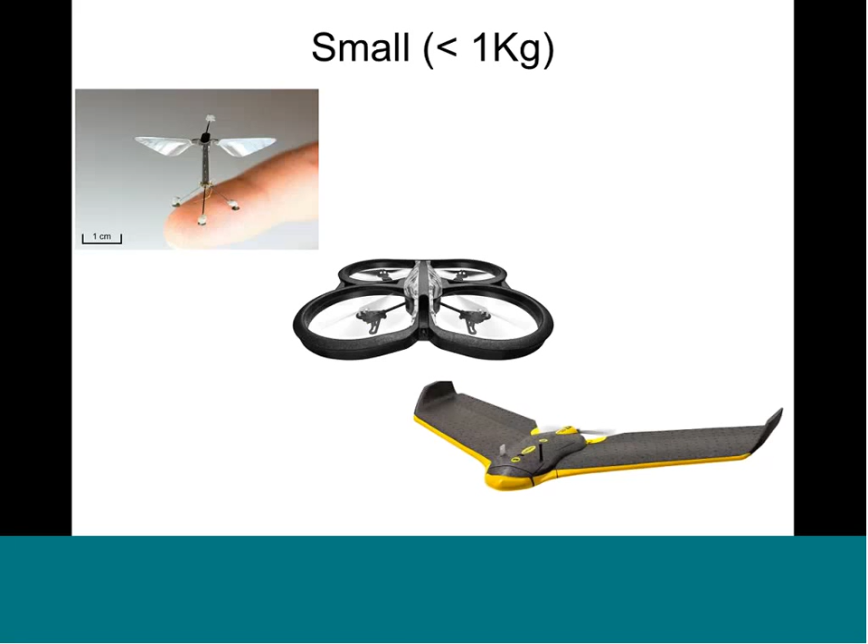Flapping wings can do amazing agility, but the problem is that they tend to have lower autonomy. Though if you want to scale the system down, flapping systems are much better. We could discuss a lot about these things, but that gives you a rough idea of how these systems compare.

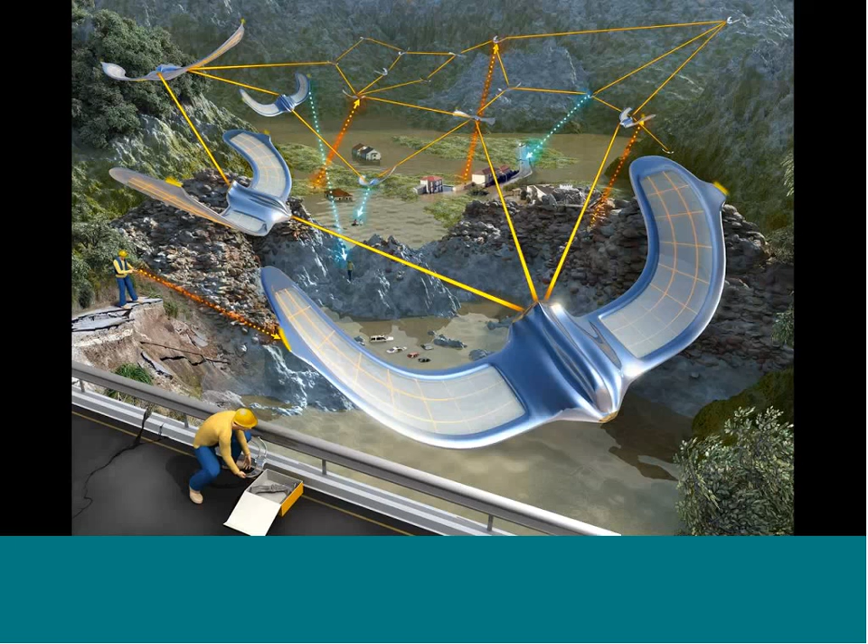And the Swiss Army contacted me and said: look, in Switzerland we have a lot of landslides, and situations where we have isolated villages in the Alps after landslides, and the communication infrastructure doesn't work anymore. Before we send rescuers on the ground, we must set up a communication infrastructure by dispatching trucks at strategic locations, and only when we have that infrastructure in place do we send the rescuers down to the ground. That takes a long time - it can take hours to get in place.

And they asked me: could you develop drones that have emitters and receivers on the wings? They can simply be deployed out of the box by a rescuer. They would go out, map out the entire area, and distribute themselves so that they establish an ad hoc local network that picks up the signals from the rescuers on the ground, creates a bridge in the sky, and connects the drones immediately.

And they keep flying by simply following the signals. They said, if you possibly can solve this problem without GPS, that's great - of course, in a defense situation for the Swiss Army, the GPS signal is probably one of the things you cannot count on. And that was a difficult part, because you say, okay, how do you do that?

So, to make a long story short, we used an evolutionary algorithm to evolve a very simple neural network that looks at the magnetic compass these drones have, and looks at the strength of the signal, and looks at the timing - they have a time dimension, looking at the time the signal is detected by these drones as they move out and in. This evolutionary algorithm came up with a solution that we then translated into a simple program that allowed us to connect two people on the ground.

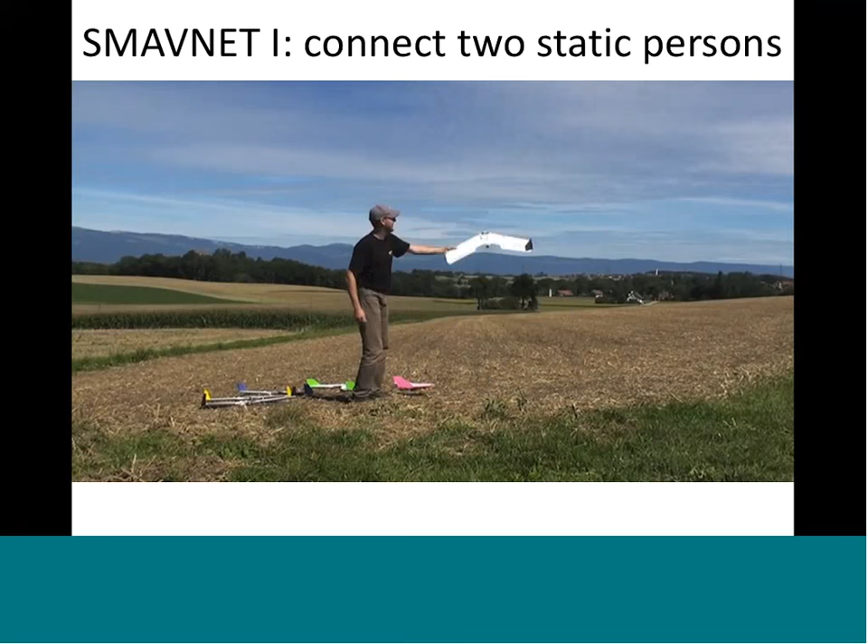So here you see one of the simulated rescuers, one of my students, and there's another student down in the forest, downhill, a few kilometers apart. He's launching the drones. The drones are flying out, spreading out using simply the strength of the signal, searching for the other person. So what they do is move out, then start to spread out, covering a large area until they pick up a signal from a person, and then they line up precisely so that they establish a bridge.

Sorry you can't see the drones precisely moving up in the sky, but essentially this worked very well. Now we are scaling this up to multiple people on the ground, especially teams of people who are moving in cities where you've got these canyons, so the signal is very restricted.

We have also been looking into sound. Oh, there is no sound. That's a pity. So why don't we have sound?

This is connected, and that's a little bit of a problem. Let me just see if I can get the sound, one second, because there is a lot of stuff that has sound. System preferences, sound, headphone port. Yes, it's in here. Should be okay. Something happened, right? Okay, let's try again. Okay, let's see. Okay, this is not working. This is off. Is it because the power is off?

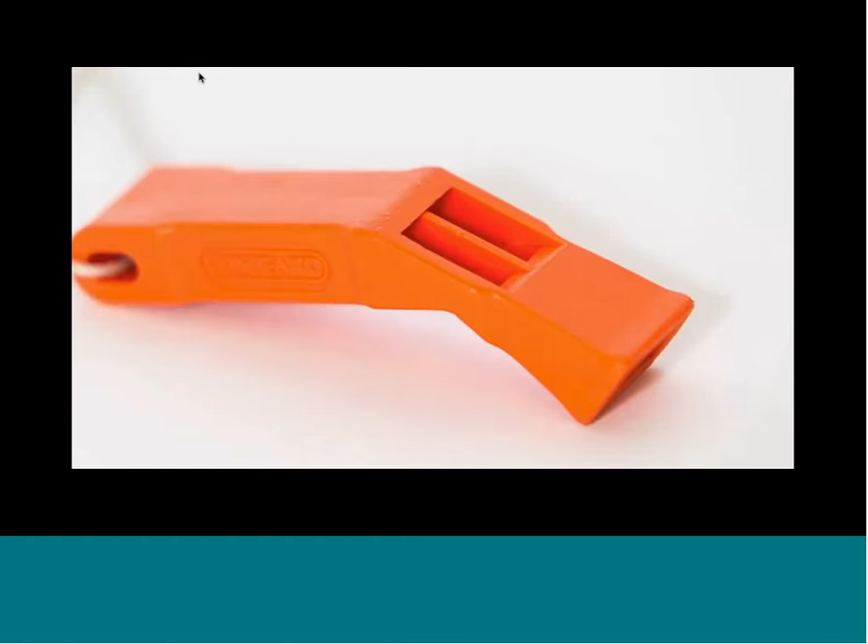Safety whistles are often carried and used by people engaging in outdoor activities such as hikers, mountaineers, skiers, porters.

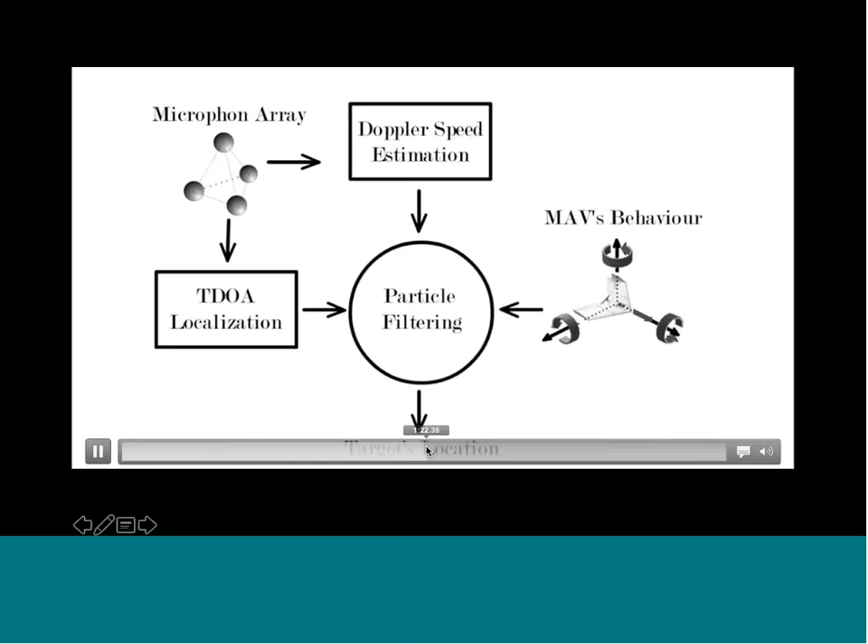Anyway, essentially, let me. Now we don't have video. How comes? What? Why? Okay, now even the slide has disappeared. Is it maybe there is a contact in this? See, the plug is loose, so definitely because the signal is out here. Yeah, so there is no more output from my computer. Projector is on, but it's red light. There is a red light. Excuse me. Yeah, no, I think projector is dead. Yeah. Or at least off. Why does this keep blinking?

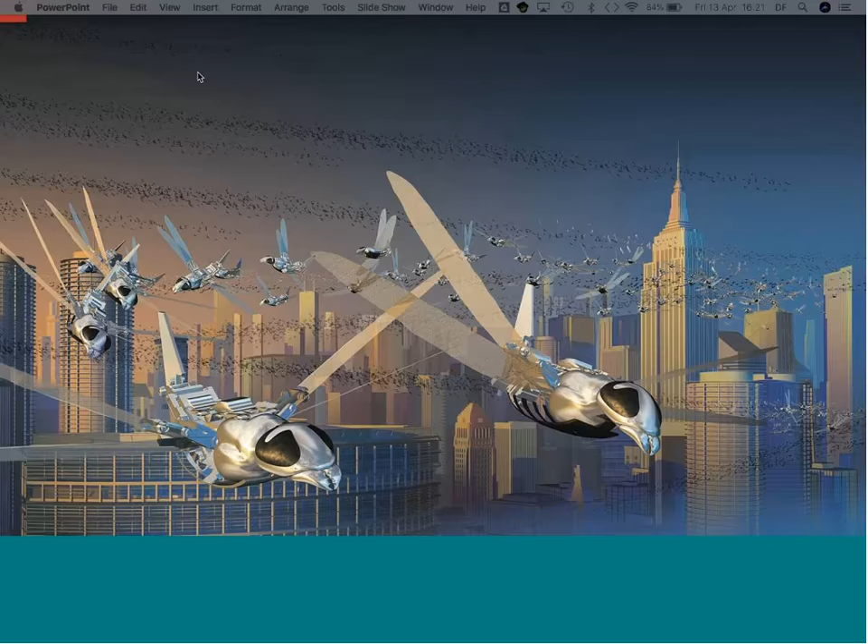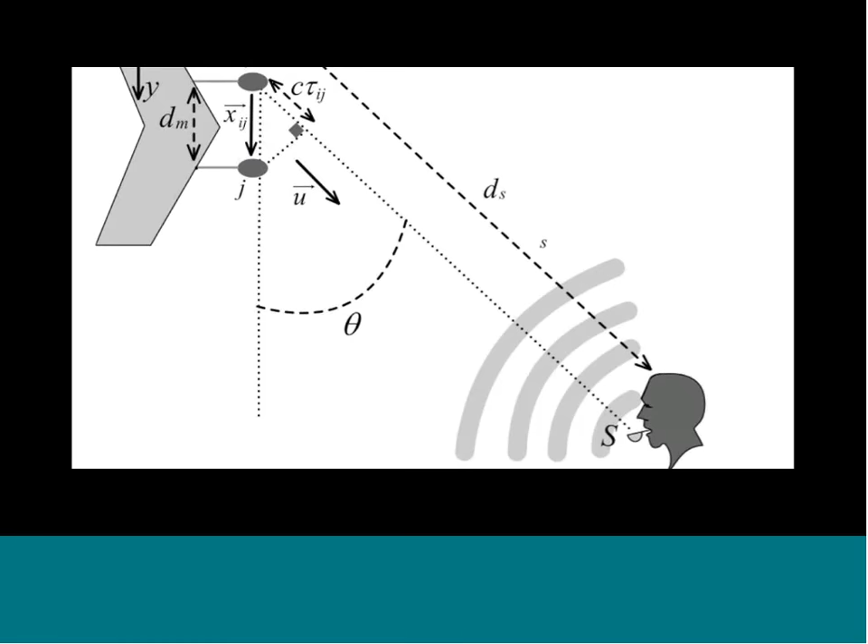So what I want to say is that essentially you can use radio signals, but you can also put microphones on drones, and you can listen to two things. You can listen to emergency sounds from the whistles that people use in emergency situations, and you can use the GPS on the drones to tell the position of the person. So essentially, the drone has microphones, flies out. There is a person who is lost somewhere in the forest. The person uses the whistle, and as the drone flies with the microphones, it can detect where the source is, using particle filtering to process the signals coming from 4 microphones and locate the person. So the drone would fly over the source of the sound, and with the GPS, we would know exactly where the person is.

So that's a very powerful solution. Then it turns out we can also have swarms of drones that know each other, how far they are, and the range and bearing, by listening to each other.

At the beginning, I thought it was impossible because of all the noise that drones make, but it turns out that if you have fixed wings, it's very easy. You can temporarily switch off the engine of the listening drone to listen to the other drones. You can even modulate the rotation of the motor speed of the other drones to give a specific signature to the frequency, so that not only do the drones know the range and bearing of the other drones, but they also know which identity, which drone is what.

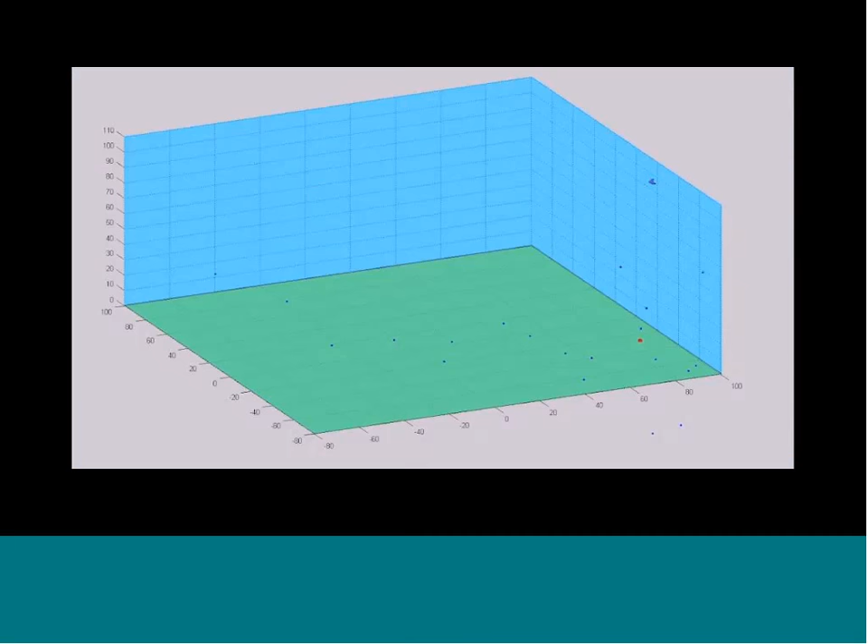That's very interesting. If you have a quadcopter, you cannot temporarily switch off the propellers because that would destabilize the machine. So in that case, we put a very loud beeper on each drone, at a particular frequency not covered by the frequency of the wind and the rotors, and you can do swarming localization by simply listening to the other drones. It's quite an interesting thing, without using additional types of sensors.

But now, vision. Vision is an extremely interesting source of information, and we know that insects use it for a variety of different things: attitude stabilization, collision avoidance, homing, altitude regulation, chasing, swarming, all sorts of things. And it's very lightweight, a passive energy, passive sensing device.

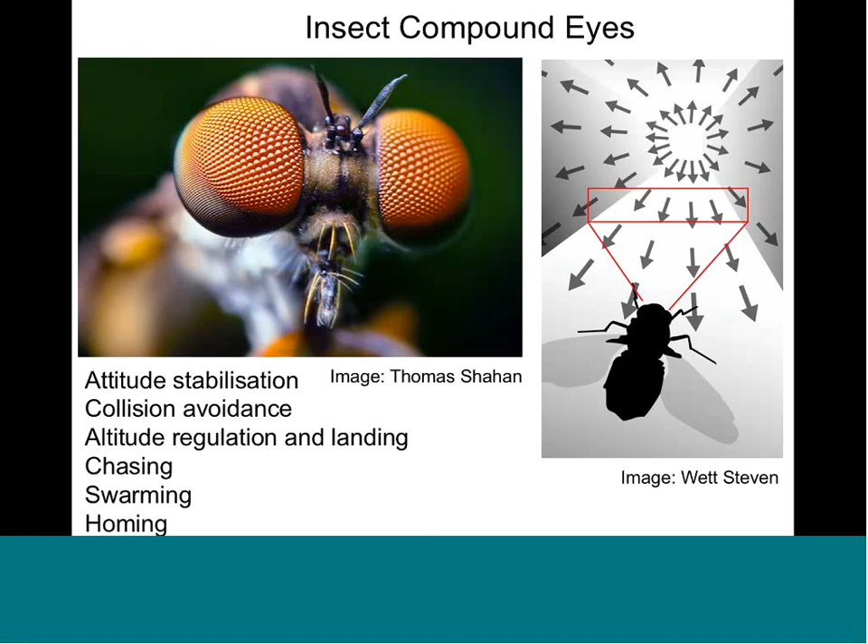We know now for many years that essentially what insects do is they are sensitive to optic flow, which is this pattern of variation of features as the insect flies through the environment. And we know that as long as the insect flies in a translational trajectory, the magnitude of those translations of the optic flow is inversely proportional to time to collision, or you may call it distance, if you know your own speed. A number of models exist, and a number of neurophysiological findings have been done.

For example, in Drosophila, or flies, there are a number of neurons that collect information in the brain from multiple photoreceptors on the compound eyes of the insect, and each of these neurons is specific to a particular pattern of optic flow in the eye, which then, after only two synaptic connections, translates into a pattern of motion of the insect. So it's a very nice machine.

We have, for example in Drosophila, approximately 13 types of neurons sitting in a particular part of the brain called the lobula plate, and we know exactly where the receptive fields are. You can make an automaton, a machine that would react to different patterns of optic flow, like landing, taking off, collision avoidance. We said, okay, could we simplify it and have only two of these neurons?

Imagine you have a fixed wing platform like the one you've seen here. This fixed wing platform essentially controls the trajectory by pitching down and up, and then a rolling motion. The combination of these two control systems gives us all the nice control of the machine.

So essentially we decided to have, you don't see it so well here unfortunately, but we have two kernels, or two neurons. One neuron is sensitive to the optic flow coming from the ventral side of the machine, connected to a positive gain, so whenever the optic flow increases in magnitude, the platform will pitch up. Then we have another kernel looking at the optic flow from the left and right sides, and depending on where there is more magnitude, it would roll to one side or the other. Now we can generalize that.

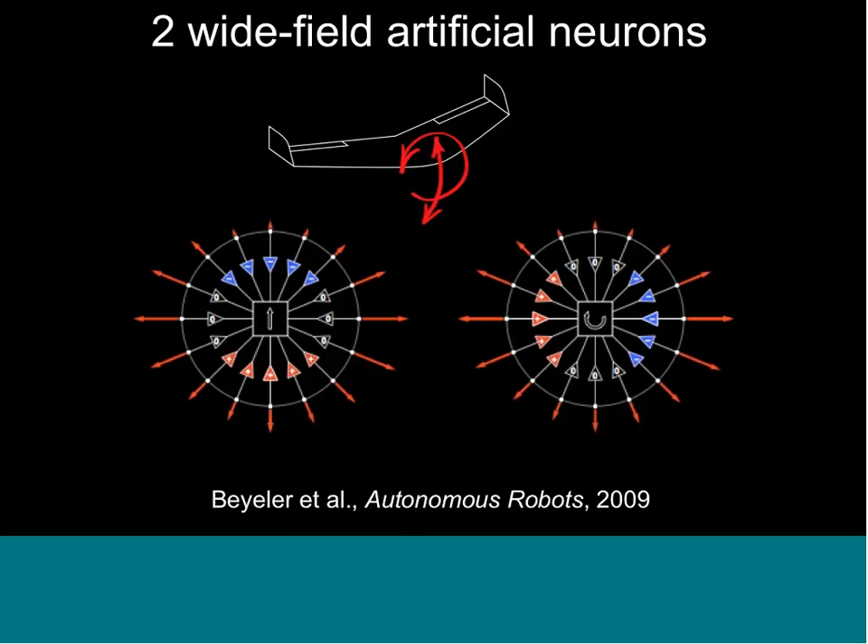We have another neuron that is the same thing, but extended with negative weights on one side and positive on the other. So we have 2 neurons that pull together all this information. Depending on where you look in polar coordinates at the pixel of the camera, we have 2 parameters to adjust, using a simple formula. With any type of geometry, you can use these 2 kernels.

Imagine you have a vision system in a fixed wing platform. We're looking at the top of a fixed wing with multiple cameras, each pointing in a different direction. This camera points to the ventral side, and as you move sideways, you're pointing slightly up. Each camera has a motion detector from one of these optical mouse devices, and the lenses are made so they focus at a certain distance.

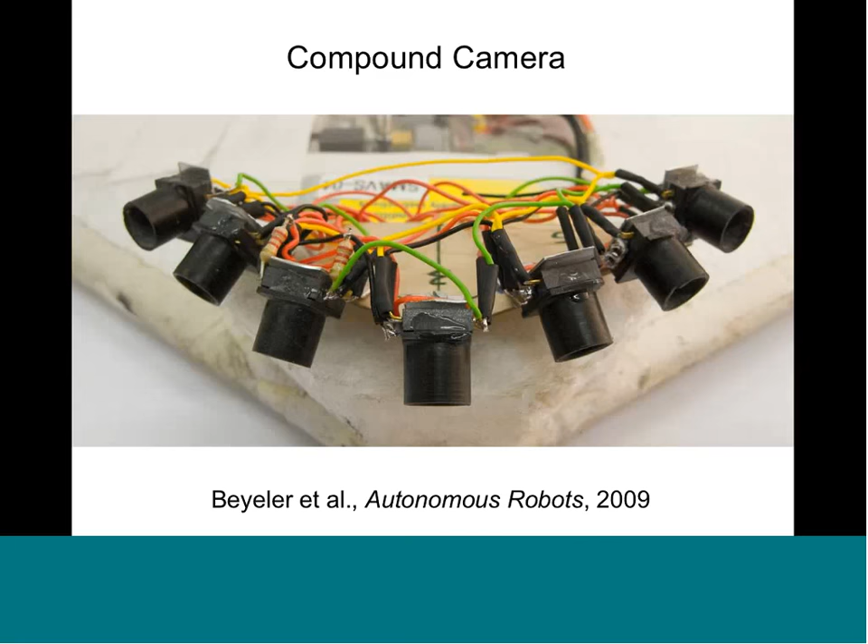Then we have these 2 neurons, essentially 2 lines of C code, that pull together information about the intensity of the optic flow. We use this to control the pitch and roll angle of the platform. We launch this platform in the air, and it's capable of not only avoiding obstacles, but also going up and automatically coming back down, avoiding the ground, doing altitude control. So with just 2 neurons, you get altitude control and obstacle avoidance.

Extremely simple. We did all this work, and at some point we knew how to control multiple drones and add vision-based stabilization. We created our first company, which Reza mentioned, called SenseFly, that back in 2009 started selling platforms like the one you see on the right for imaging purposes.

The machine was extremely simple to control—you launch it in the air, and it's capable of doing all the altitude regulation; people don't need to control it remotely. The company then developed a new platform, a quadcopter, and we sold the company to Parrot a couple of years ago. It became the 2nd largest producer of professional drones in the world, after DJI in China.

But the beautiful thing about the research project I've shown you comes here. That drone didn't have vision-based capabilities to avoid collisions, but we added a few optic flow sensors on the ventral side, because one of the difficult problems is landing these platforms. When they've finished mapping, they have to come back to the operator—typically a farmer or someone operating a mining company using it for mapping.

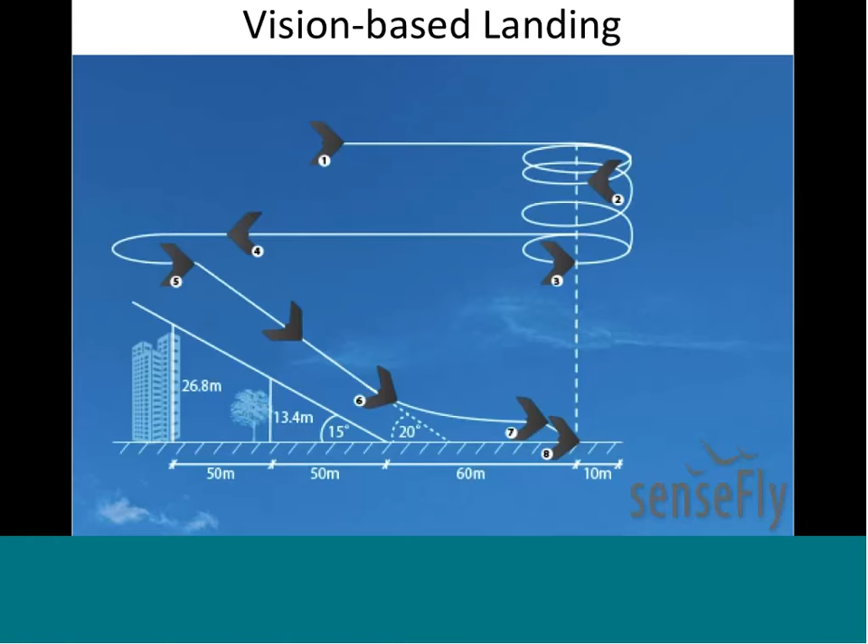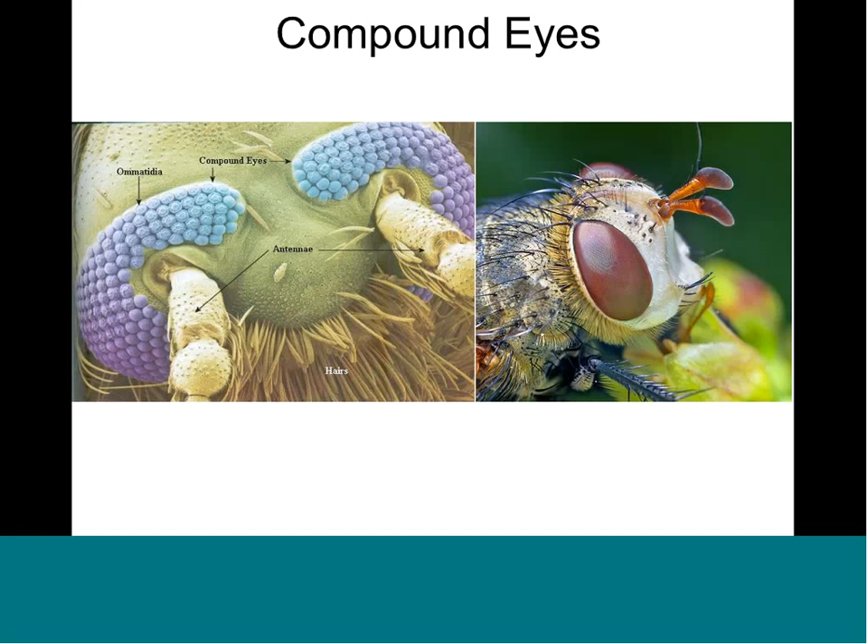But that optic flow camera was a bit bulky. So how could we have compound eyes like those of insects that are so small and compact, yet give such high resolution? I set out to do a European project where I brought together people with different skills in optics and neuromorphic chips, and we built an artificial compound eye composed of 3 layers of materials, manufactured first on a planar surface because we wanted to make it a product.

So we use traditional planar manufacturing procedures. We have one layer of polymer lenses on top, then one layer of neuromorphic chips, analog VLSI chips, that you see in blue here.

Each of these neuromorphic chips mimics the properties of the housefly receptor, so they can adapt to different luminosity of the environment, and they are sensitive to contrast, to the motion in contrast.

Then we have a flexible printed circuit board that takes all the signals out of these photoreceptors, and each lens is precisely aligned with each photoreceptor. We also have a number of black thin film polymers so that we don't have crosstalk of photons coming from neighboring lenses. We make sure each photon coming to one lens goes precisely through a tunnel, precisely onto the photoreceptor.

So we align precisely the optics with the neuromorphic chip and the contact points on the PCB. Then we cut columns of this planar structure down to the flexible PCB, and we bend it around the microcontrollers, like wings, like the eyes of insects cover the brain, the computing power.

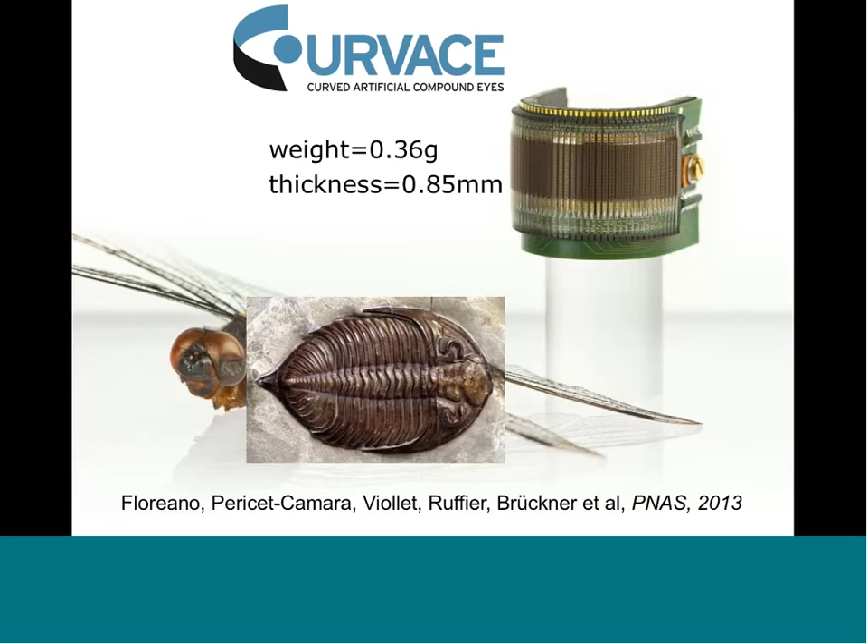You don't see them, but they're sitting on top here. They have two cylindrical compound eyes, and they have exactly the same dimension as our compound eye. So it's amazing. If you give us 250 million years more, I'm sure we'll get down to the size of insects.

But the beautiful thing about this is that you can also make vision tape, what I call vision tapes. You take the same technology, make a line of photoreceptors on a flexible PCB. We have strain sensors, bending sensors, that our colleague Stephanie Lacour developed at EPFL. And we can bend these sensors.

With the strain sensors, we know the relative angle, the visual viewing direction of all the ommatidia. So we can do the computation and give vision to any bent object. We can put it, for example, around a hemisphere like this, and by doing that, we have 360-degree field of view everywhere.

Now you might say there are blind spots here. Blind spots can be easily addressed by slightly changing the viewing direction of every triplet of ommatidia so that we completely cover the 360-degree space.

So in the future—this is work in progress—we would have compound eyes used for obstacle avoidance, maybe glued around the shapes of drones, and then we would have more traditional cameras for doing other types of operations in the center. But no matter how good your visual system is, no matter how good your control system is...

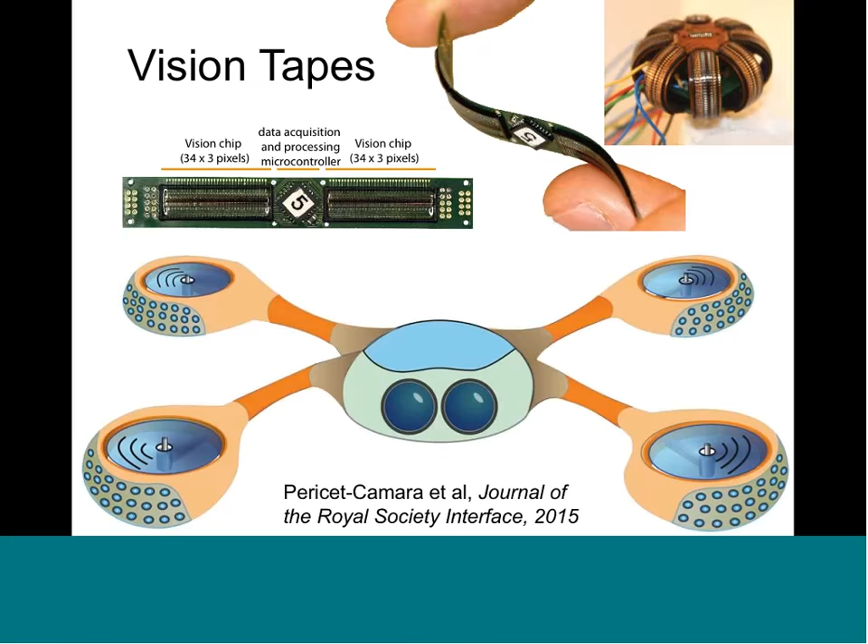We shouldn't try to make drones more intelligent in terms of avoiding obstacles. We should look at what insects do when they collide with things. Essentially, insects use two strategies, I would say. One is the fact that their body is not rigid, so it doesn't break if they fall.

The second thing is work done by Stacey Combes when she was at Harvard. She put these wasps, which are dead, on the tip of a drill. She rotates the drill and lets the tips of the wings of the wasp get in touch with the surface.

She noticed that these wings are extremely resilient. They resist thousands of collisions with an obstacle, and they do so because essentially they have variable stiffness. They have lines of flexion which, under the type of mechanical forces the insects experience during flight, do not bend. But as soon as a much larger mechanical force is applied, they give way, they bend, and then they snap back in place.

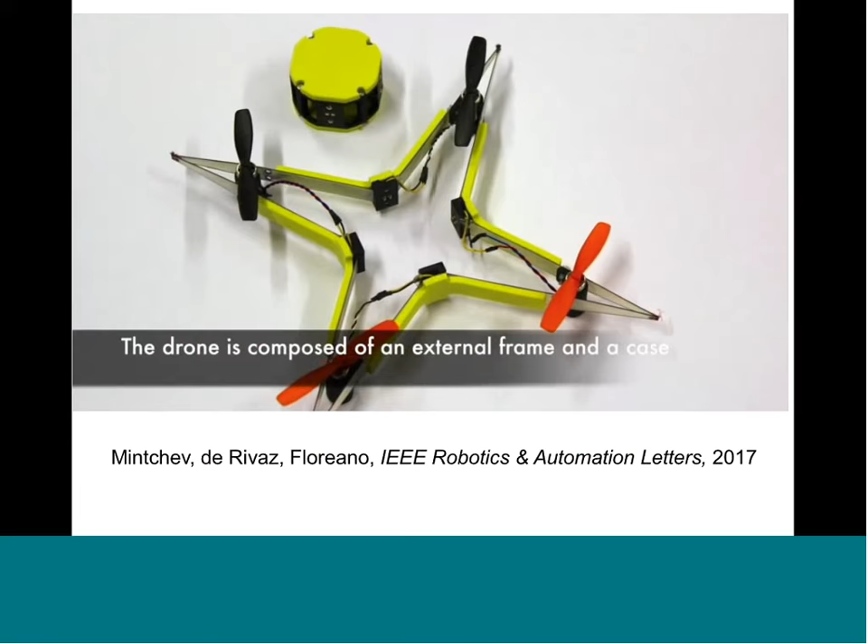So it doesn't look like a wasp. It's made of an external frame and a case. The external frame is extremely flexible — you can bend it with your hands. But like this, you don't have sufficient rigidity for flight.

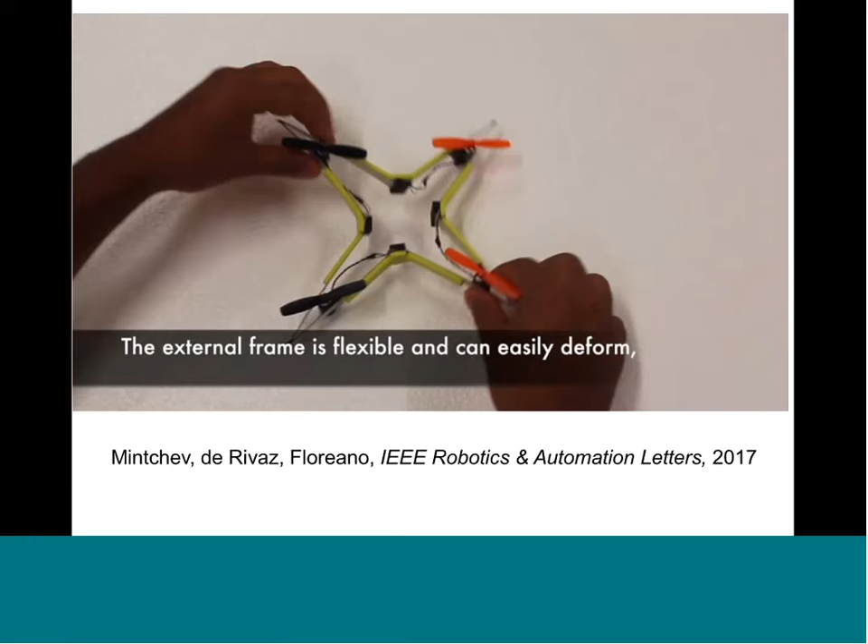What we do is put the inner body, which has a microcontroller and the battery, inside with magnets, and now the structure is extremely rigid. So you see, then you can fly — it's so rigid, now you can fly this.

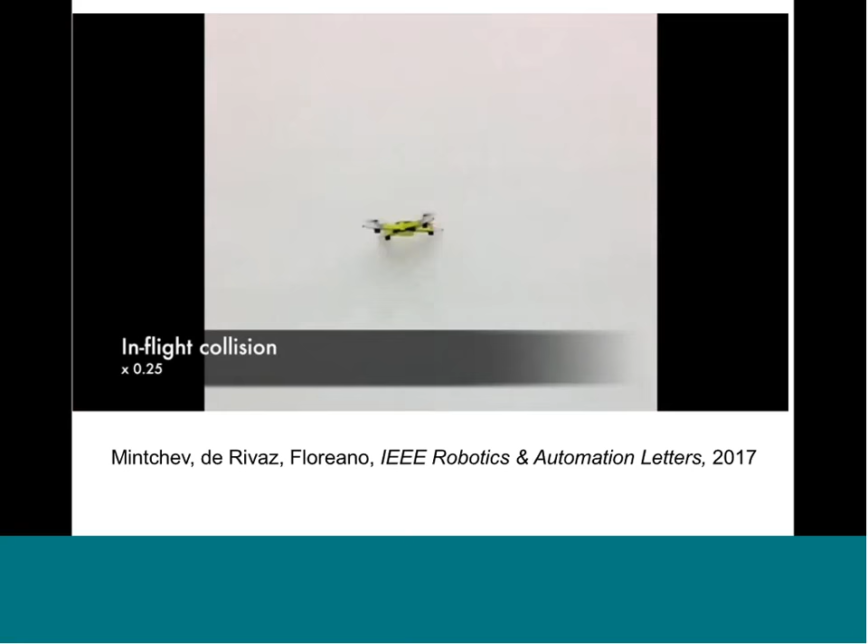Now, as you will see, it flies against the wall, falls on the ground, and then takes off. Let's look at it in slow motion. You will see that the drone flies against there, it deforms, it absorbs the collision, falls on the ground, absorbs the collision, and it doesn't break.

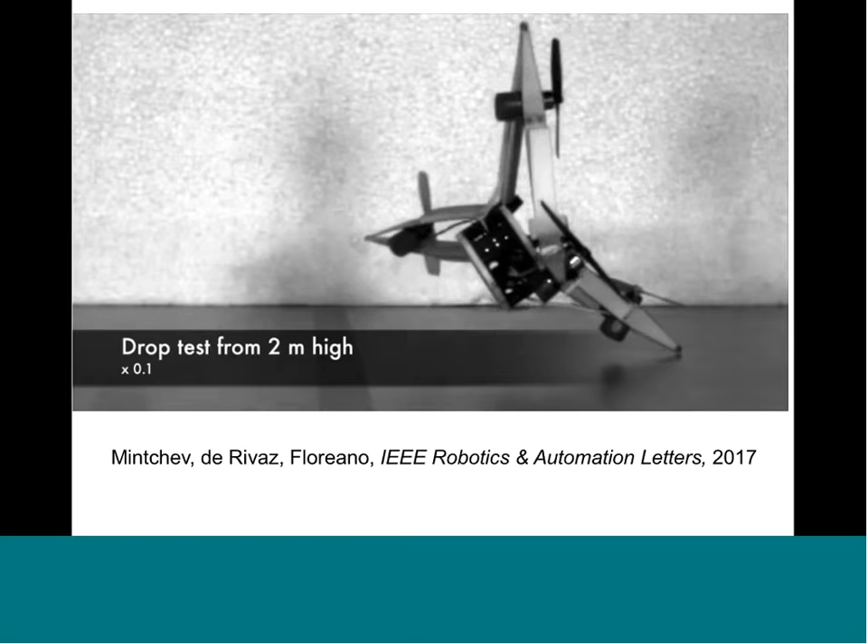Let's look at it again. You see also we have small ropes that keep the inner body in shape, and then it snaps back into shape and doesn't break. So it's a way in which we abstract those rules and make a machine that I call the unbreakable drone.

The second strategy that insects use — I sent a student to Rob Wood at Harvard to measure how flies fly in very confined environments. What we noticed is that flies don't try to avoid obstacles anymore when they fly in this environment. They just collide all the time.

The body absorbs the collision, and they use the legs to upright themselves in flight, or if they fall to the ground, to upright themselves in the right position from where they can take off again. That's another interesting strategy.

So I thought, well, we could design drones that have a cage that can absorb the collision and retractable legs. So when they fall on the ground, when the control system cannot stabilize the drone, they would release the legs to upright themselves again and fly off. And we did indeed make a prototype here.

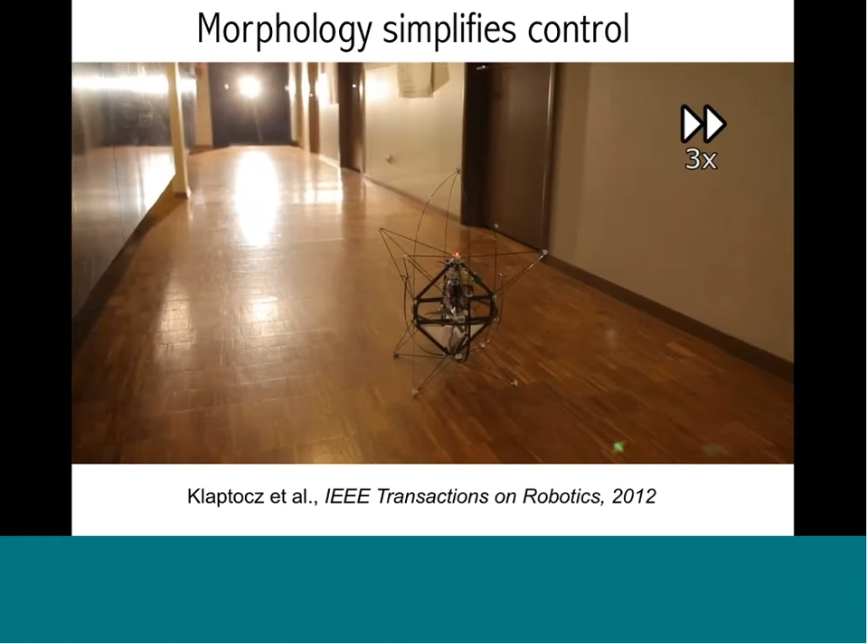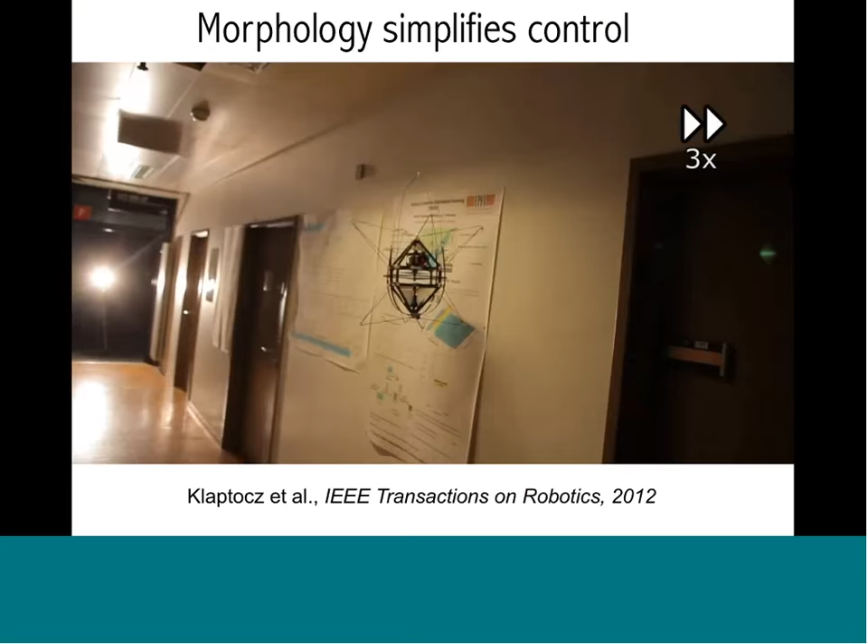It uses an Euler spring cage, and it has retractable legs that upright the drone, and then the drone would fly again. The goal of this drone is to fly towards the end of the corridor where there is light. It has only one light sensor rotating on top of the drone, where the red light is. Thanks to its morphology, all it tries to do is fly towards the light, and it will collide with things, fall on the ground, take off again, and fly again.

So we are trading, if you like, intelligence for morphological and mechanical properties.

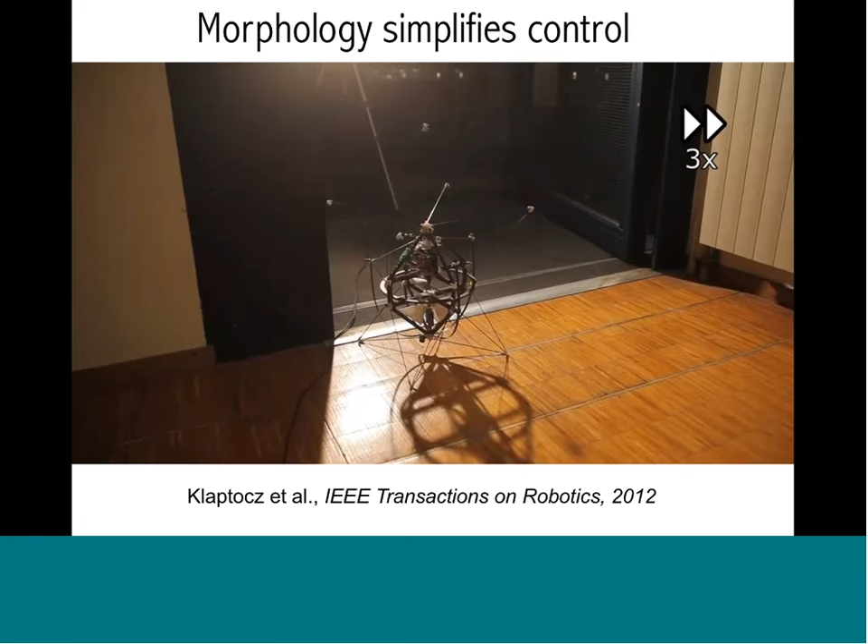That's not a very efficient way of dealing with collisions, because what happens is you have an obstacle, and the thrust vector is destabilized, pointing in a direction that's not the direction you want to go. The drone would fall on the ground, and then you have to use a lot of energy to take off again and fly. So we thought, well, how could we prevent the falling?

And then we thought, what we could do is have an additional cage with a gimbal system that freely absorbs the collision and rotates around the inner cage, so that the propulsion system, which is solidary with the inner cage, remains passively stable as the outer cage absorbs the collision.

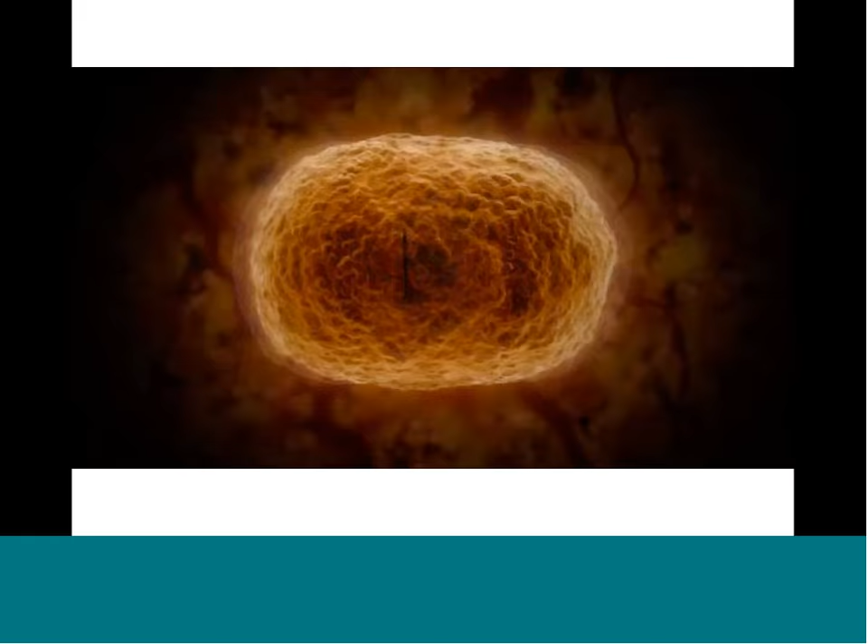So we translated that into this video. The goal of this flying robot is to reproduce the amazing capabilities of insects, especially the fact that they can collide with things and continue flying afterwards.

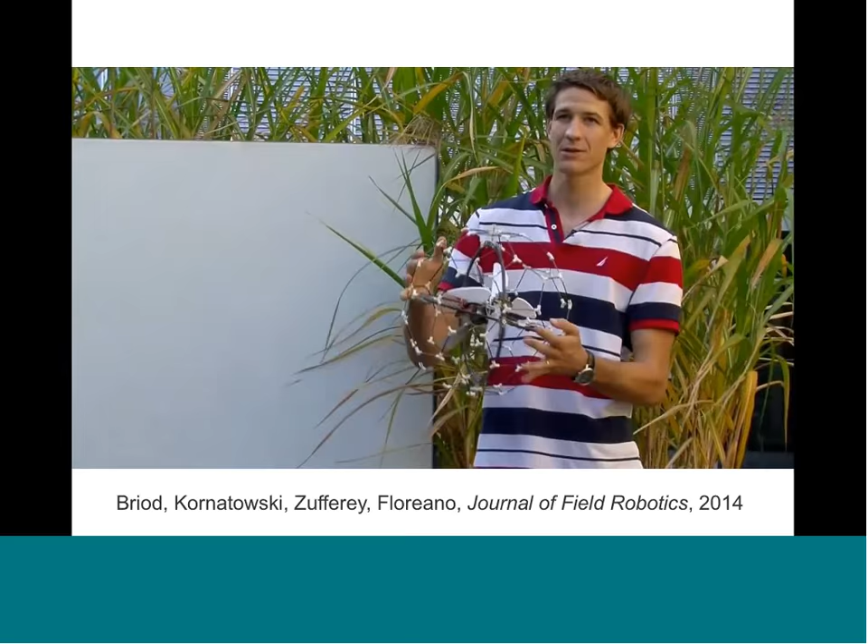To reproduce this, we realized that we could put a lot of intelligence in the mechanics by having this rotating frame around the inner frame that always remains stable even when there are collisions.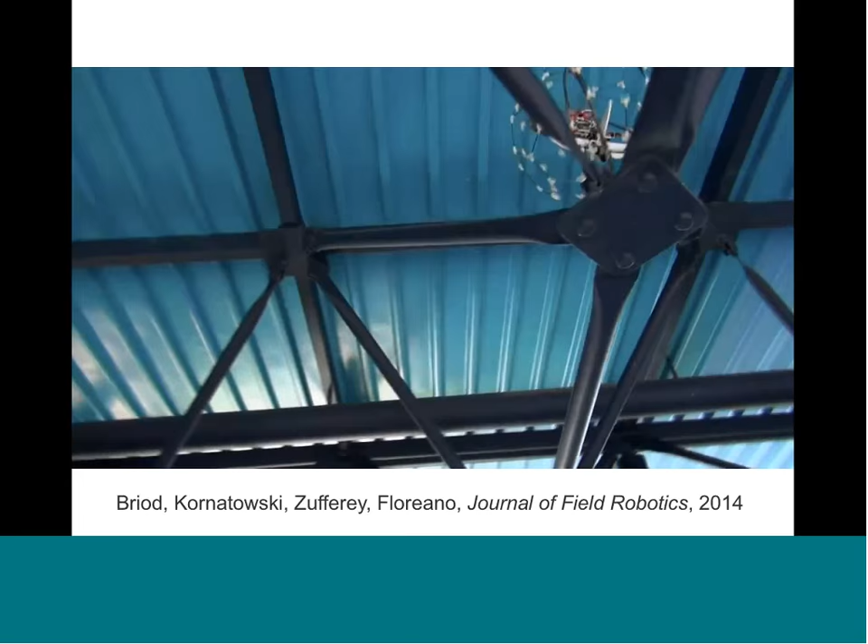This allows us to send the robot into very difficult environments, for example for search and rescue missions where there are obstacles. We can do that without complex obstacle avoidance techniques, giving us a very lightweight platform. The novelty of this platform is its rotating protective frame.

It decouples the inner frame with all the stabilization system and avionics, so that when a collision occurs, the inner frame remains stable and only the outer frame rotates.

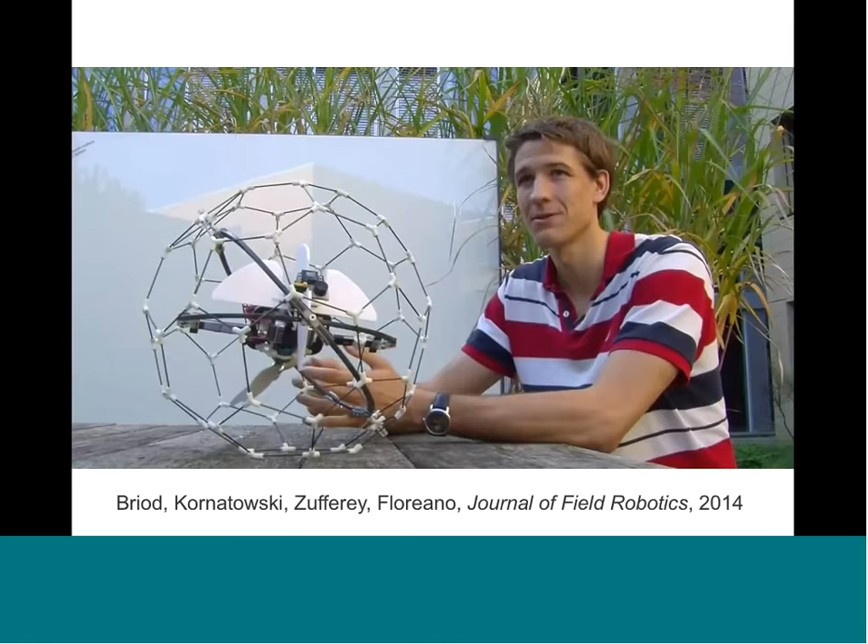To test our robot, we flew it completely automatically through a forest. We just gave it a magnetic direction, and without any obstacle avoidance technique, it was able to fly for several hundred meters while encountering multiple collisions with trees.

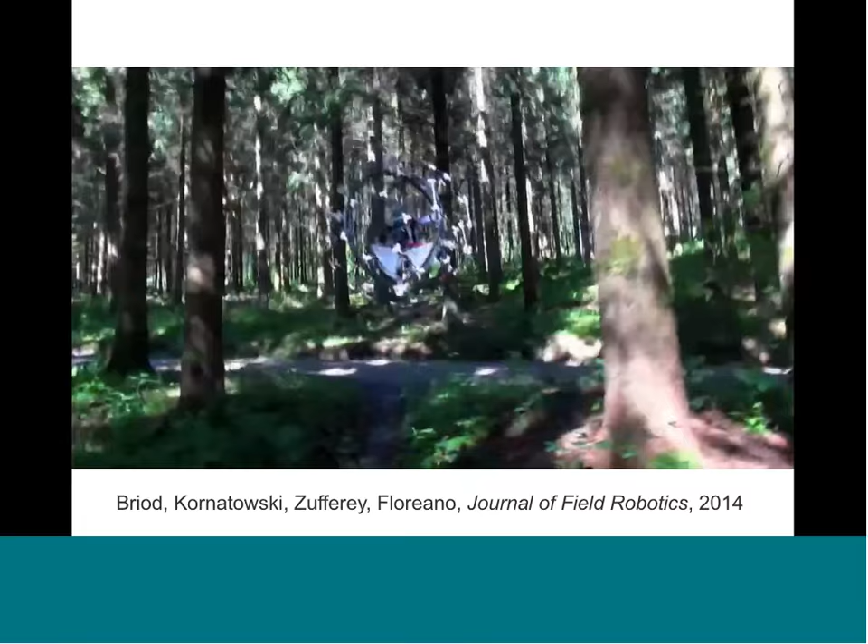So this drone—you see the camera is attached to the propulsion system and it's not much destabilized. You can cancel out the outer frame very easily. It's also safe; you can touch it, you can grab it. So it opens a range of different possibilities.

We sent this drone to the United Arab Emirates competition, Drones for Good. The goal was to locate a person in a collapsed building across the river. Out of 800 entries from 57 countries, back in 2015, we were the only ones who could do this, and my students got a $1 million US award for it.

And we said, hey, we have a great thing here, so we should start a new company, because we can go and inspect things no other system can reach. You can fly in very confined spaces, do inspection of boiler tanks, large industrial boilers, and you can send this into caves.

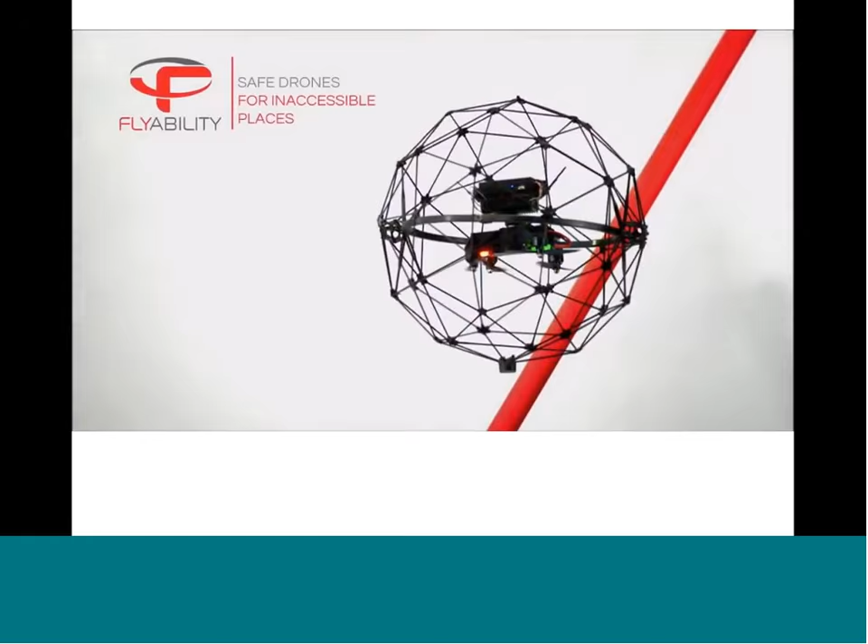So we spun off a new company called Flyability, and this is the refined version of the drone. It's not difficult to pilot this drone—essentially, it's the world's first collision-tolerant drone.

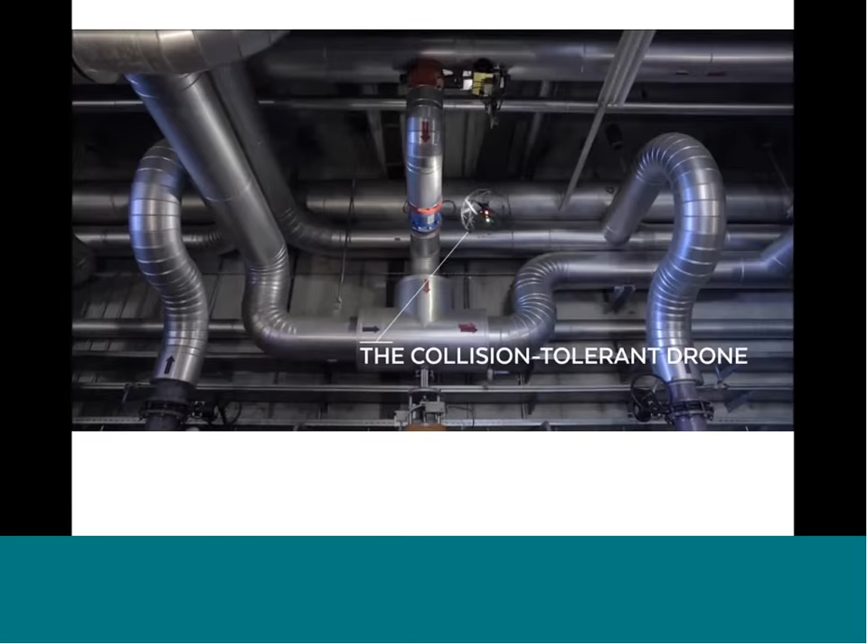We've improved the communication system so that you can send this down hundreds of meters and do inspections where no humans can go. The company is doing very well—it's quite successful and already selling well.

But let's go back to a situation like the Fukushima disaster. You want to send drones to do sensing, for example of radioactive material, but you don't want to get too close because it's very dangerous. So you want to stay a few kilometers away.

Now, if you want to do sensing, you want to go very close down to the ground, so you may want to send a quadcopter. But quadcopters, if you want to cover long distances, need to have a much larger mass than a fixed-wing drone. And if you have a much larger vehicle, you probably cannot go into small places and do inspection.

So we said, how do animals do this? How could we have a flying wing that can also go to the ground and start locomoting to the location where you want?

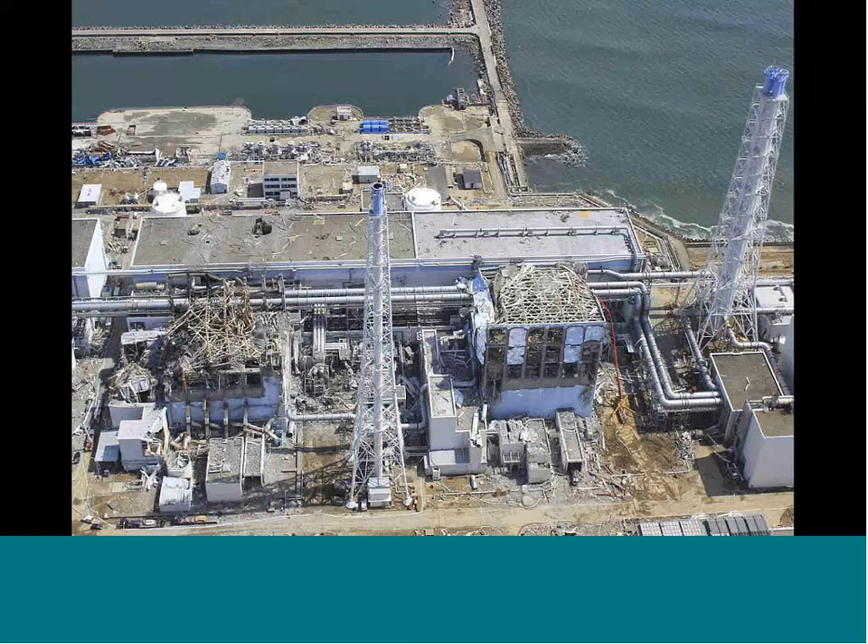Nature is amazing—we found there is an animal, the vampire bat, which reuses its wings for jumping on the ground. It flies near a camel in the desert, then jumps up to the leg of the camel and sucks its blood. We found that very interesting because it's a sort of morphological adaptation for multi-modal locomotion.

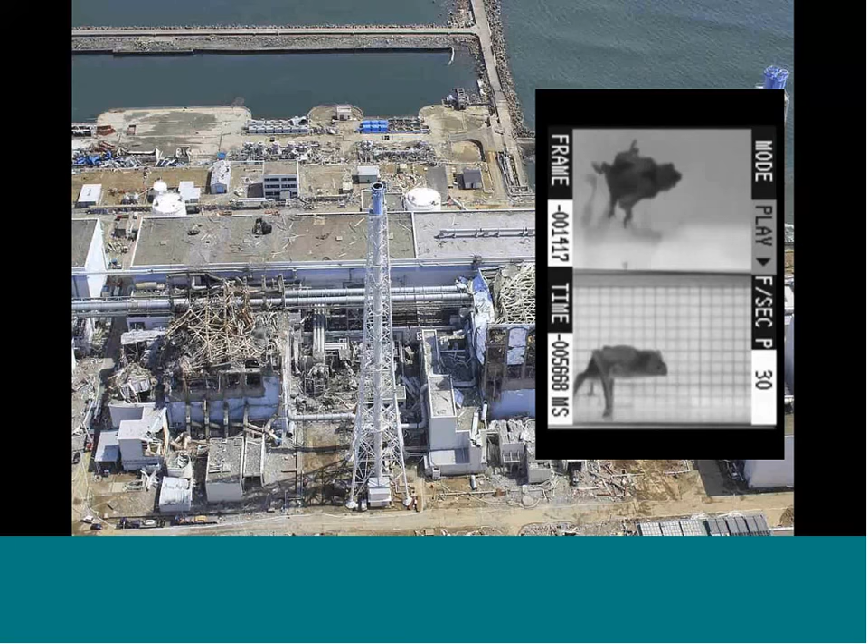Instead of having separate wings and a locomotion system, you just reuse the same actuation system for two different locomotion modes. So we created the first prototype here, which...

The laboratory of intelligent systems is developing a flying platform which has the ability to move on the ground by using its wings only.

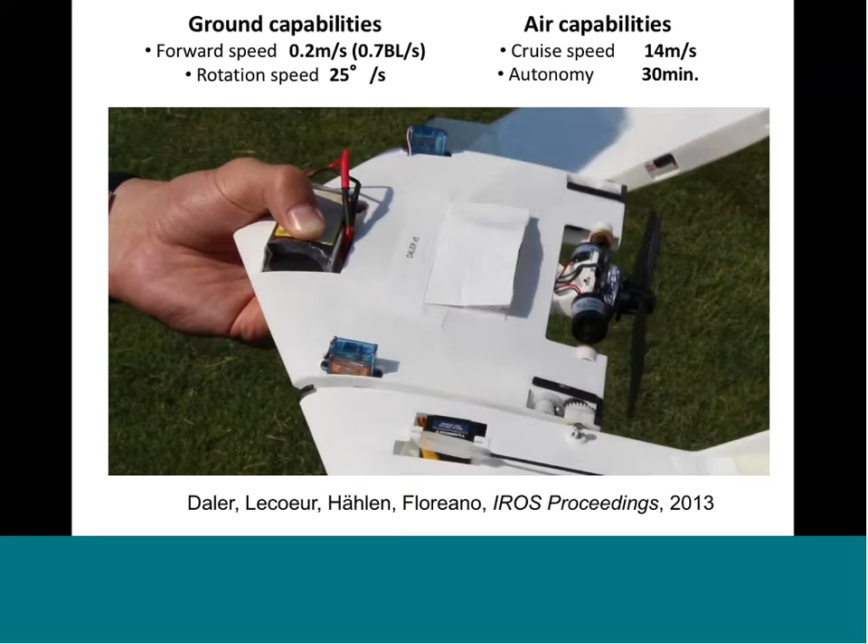A locking wing mechanism was designed to ensure a good position and rigidity of the wings during the flight phase. Once the wings are locked, several motors are used to actuate the elements on the wings which control the flight. After the robot has landed, the wings are unlocked and can rotate continuously, allowing the robot to move on the ground.

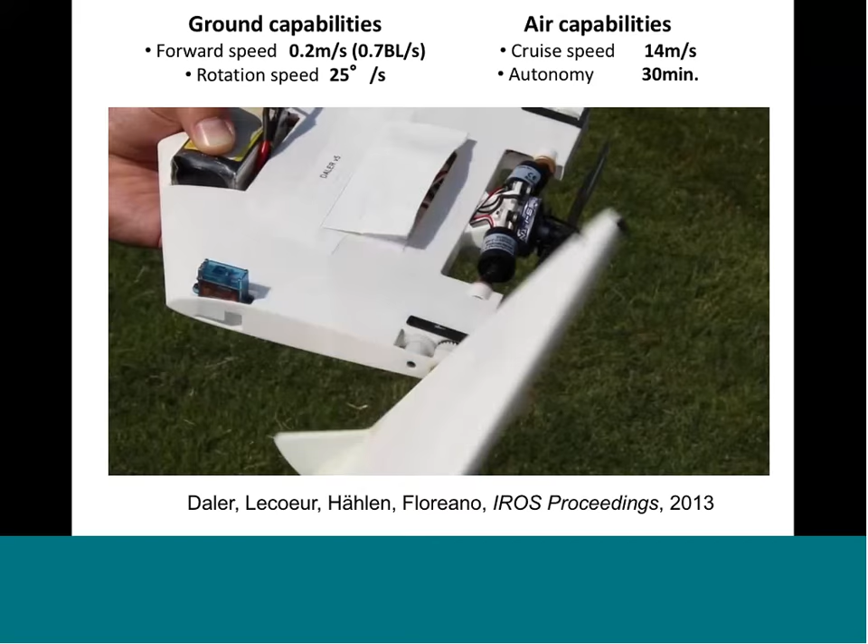It's very stable. Using the wings as legs to move on rough terrains, instead of adding an additional structure to the robot, minimizes its structural mass. Therefore, this design minimizes the total weight of the platform and thus minimizes the impact on the flight performance of the robot.

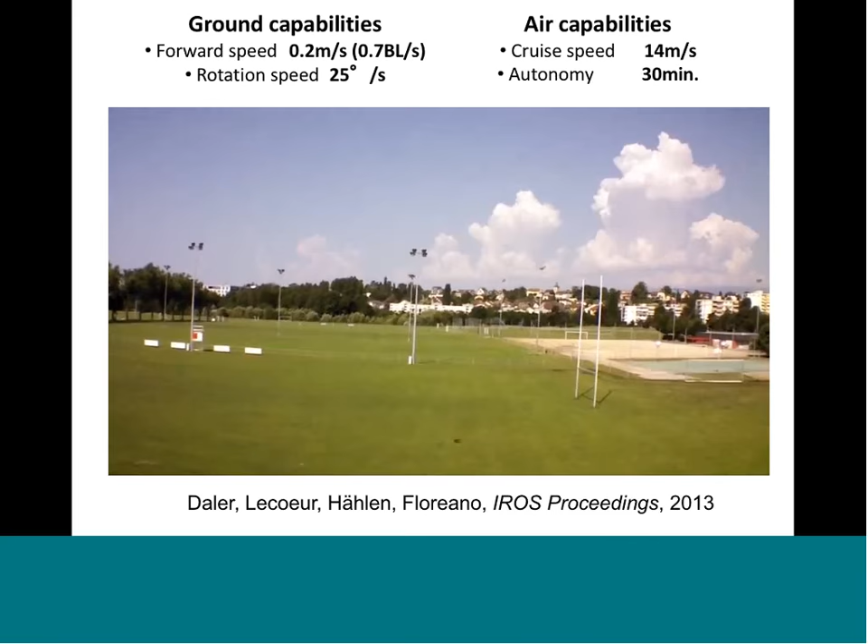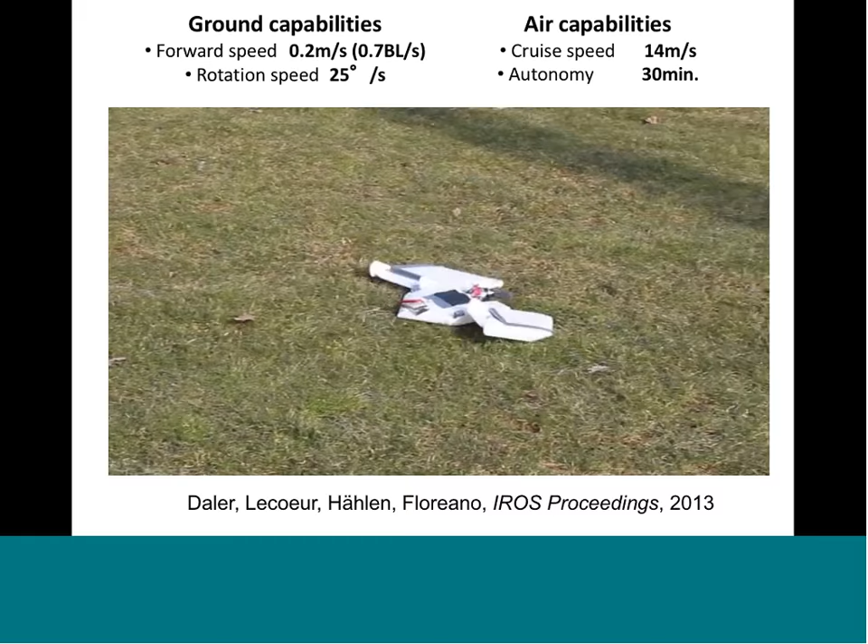The morphology of the robot is optimized for ground speed. It can move forward at 0.2 meters per second and can rotate on the spot at 25 degrees per second. The robot is capable of walking on different surfaces, can overcome high obstacles, and can also navigate rough terrains.

If you want to do multiple types of locomotion, you typically have different types of constraints. For example, if you look at ground and aerial locomotion, you need different values for torque and speed. When you are in the air, you need very little torque, very high speed for the ailerons. When you are on the ground, you need a lot of torque, not very high speed.

When you're flying, you want to have your center of mass slightly forward. When you're on the ground, you want to have your center of mass precisely balanced in the center of your vehicle. The inner ratio, which is essentially the distance of the tips of the wings from the center of mass of the drone: when you're flying, you want to have the wings spread out; when you're walking, you want the tips of the wings closer to your body. So these are different constraints, and when you want to adapt the morphology, you want to bring your system so that these different contrasting values are optimized.

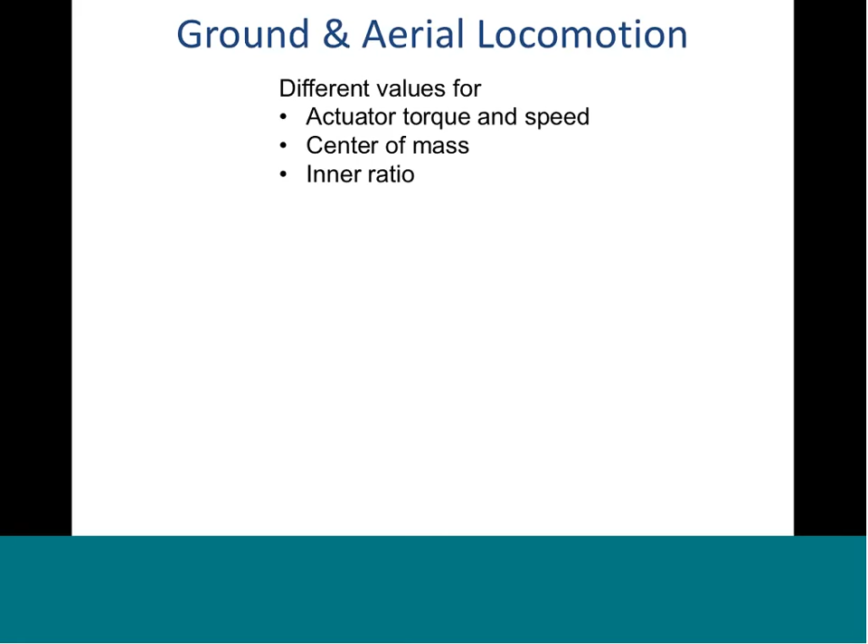So now we looked again at birds, and we see that birds, for example like bats, have certain types of morphologies that allow them to move between those different locomotion modes, especially multimodal locomotion, into a regime that minimizes the cost of transportation.

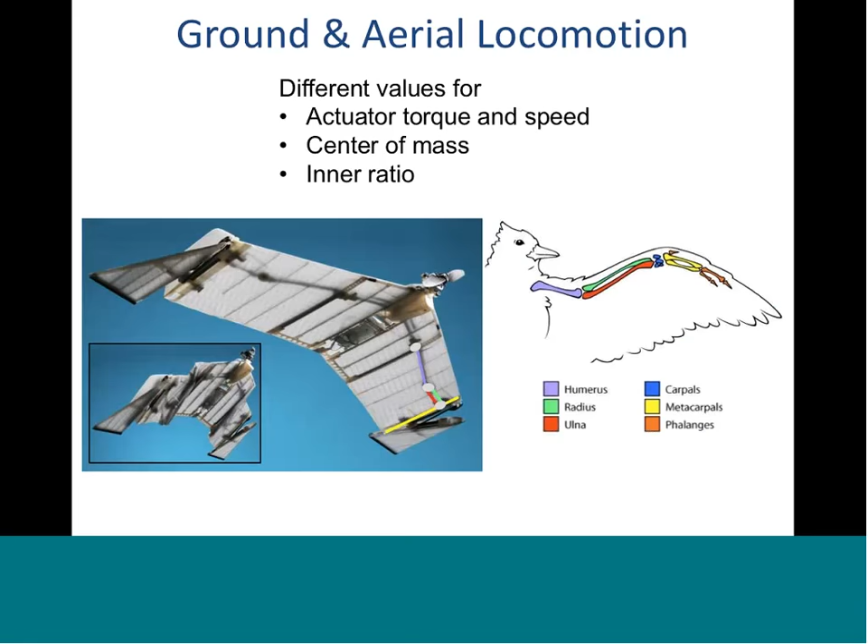And we created a new platform, which is here, which has some springiness and softness to it. There is a system of springs and softness so that you can hit the wings and they will not break, so they can sustain hard landing. So you see here, we are hitting the drone with a hammer, and it doesn't break.

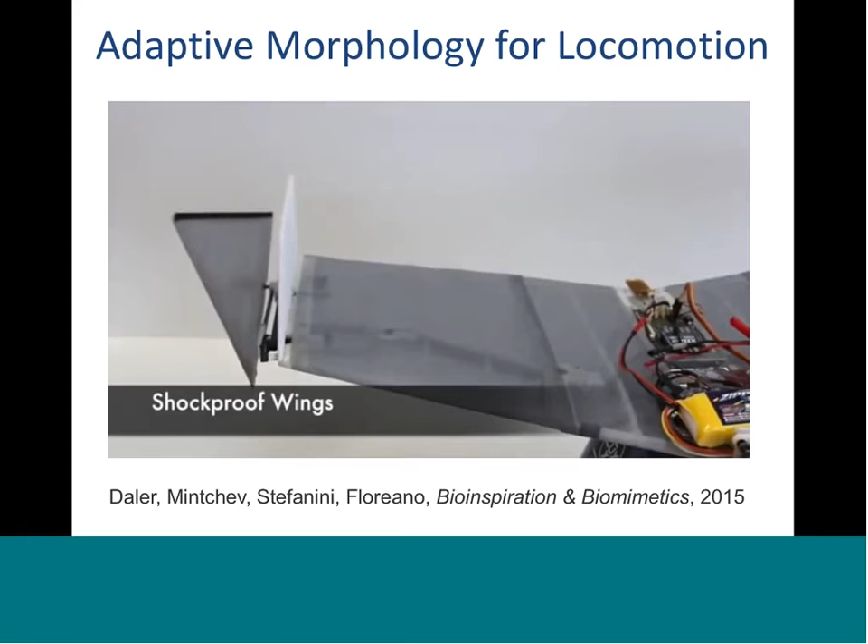So anyway, I don't have time to show the video, but essentially we came up with a principle we call adaptive morphology. We look at animals that change different locomotion modes, and we see how they adapt their morphological shape so that their muscles operate in the optimal regime. Then we extract design principles for drones, for machines that display multiple modes of locomotion.

There is another type of morphological adaptation that birds have, and they use it not for multiple types of locomotion, but for flying in different aerodynamic conditions. For example, if you want to fly at very high speed in order to minimize drag, you want to have a small surface area, but then you will have smaller maneuverability. If you want higher maneuverability, you want to spread out your wings.

So we see that birds, indeed, no matter what the bird is, as they increase flight speed, they also tend to decrease the surface area. So we said, could we have drones? If we want to develop drones that fly, for example, in cities, where sometimes you have urban canyons with strong winds coming, you may want to close your wings, or change the angle, or spread them out. So we said, could we have drones that can change their morphology to adapt to different wind conditions?

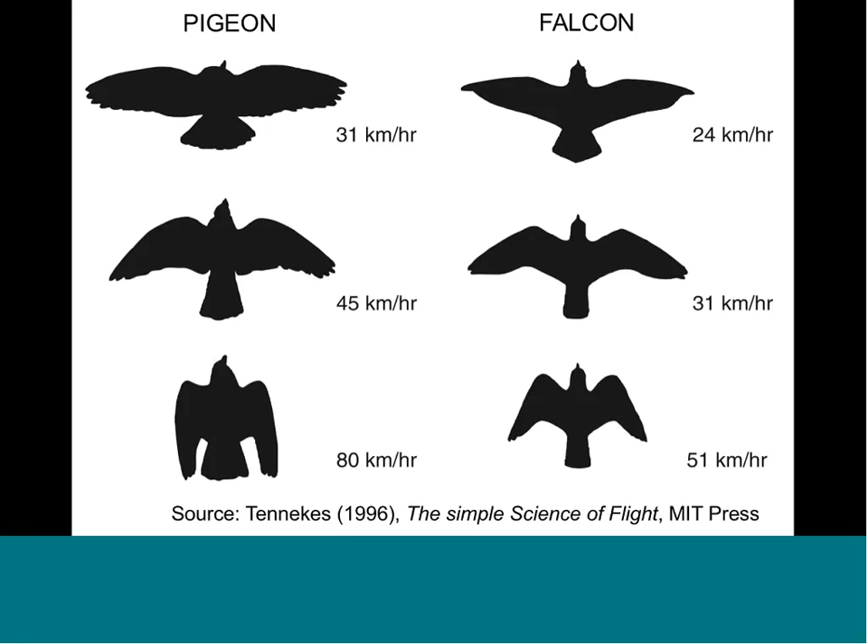Again, we look at birds, and we see that feathers are very interesting because you can easily fold them and change effectively the area of the drone. I'll let this video play, which explains how this works.

So we can have symmetric folding, so we can change the total surface of the wings to fly at different wind speeds more efficiently. We tested all of this in a wind tunnel, of course.

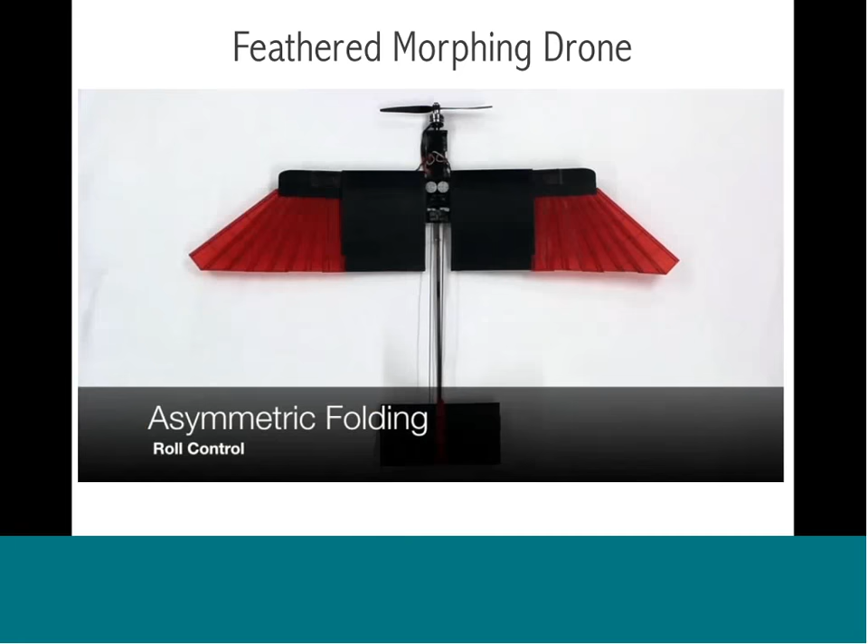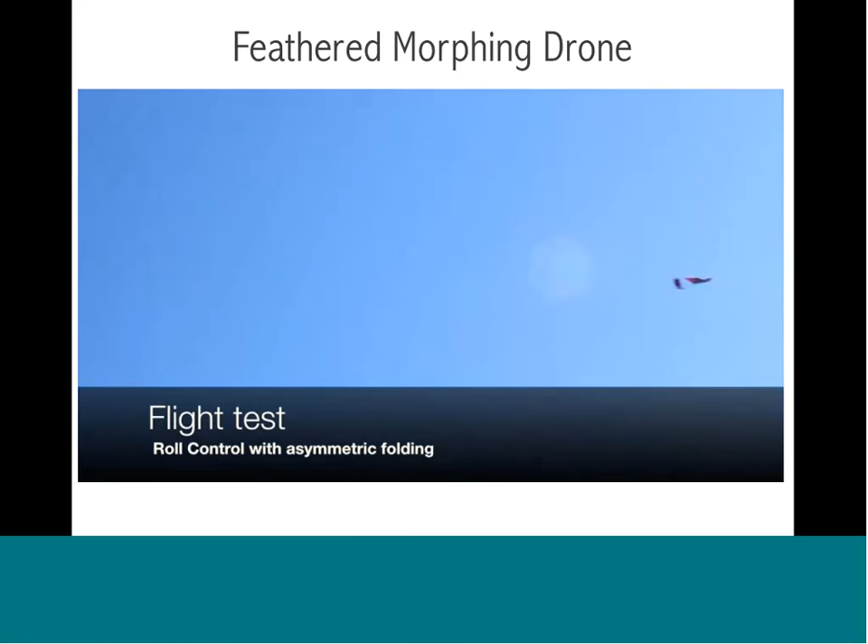And then we can also do asymmetric folding for rolling. So instead of using additional elevons to control the roll, we just asymmetrically switch the morphology of the wings, and we can smoothly control this drone in the air.

The biggest challenge of this project was to design these feathers. One of the things I'd be very interested to talk to Sarah about is how we could do local sensing at the level of the feathers of local turbulence, because we know birds have lots of information coming locally that would allow the system to adapt the morphology without going through a central processing system.

At the moment, this drone is teleoperated, and now we have a project where we are extending this feather structure and this agility of the drone to the softness also of the body, and adding control. So that's what we're working on.

Now, drones have another big problem, and that's size. Because of the laws of physics of aerodynamics, the lift of a drone is proportional to the product of two things: the aerial surface, and the speed of the air over this aerial surface. So in order to increase lift, you can either fly faster, or increase the size of your propellers or wings. And because you cannot fly these small drones much faster than a certain speed, most of the time if you want to carry larger loads, you have larger propellers or larger wings.

And then you have a problem of transporting the drone to the location. Most of the companies that make drones, like my former company, make foldable drones that you can put in a box, then assemble together, and then fly out. DJI makes drones that can fold mechanically. You can fold them; they are still in place.

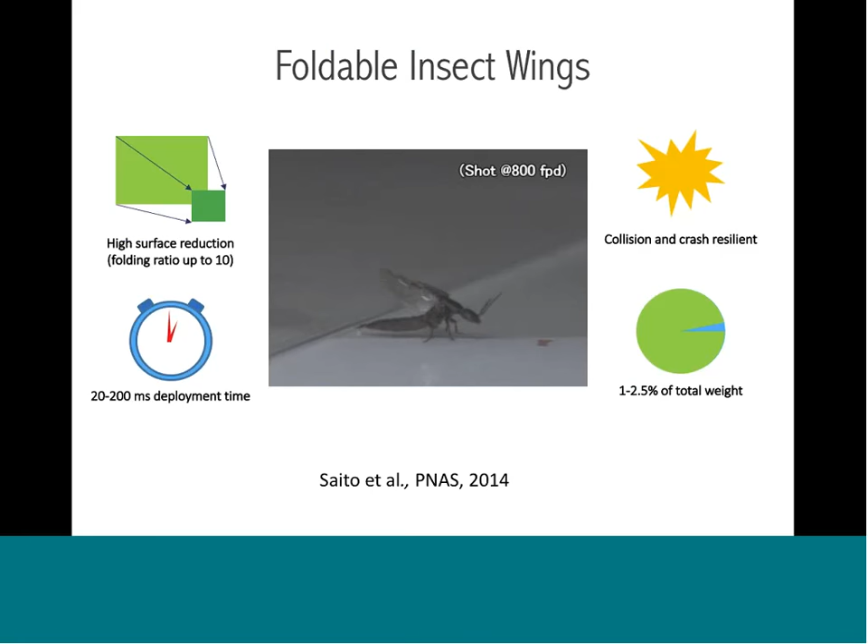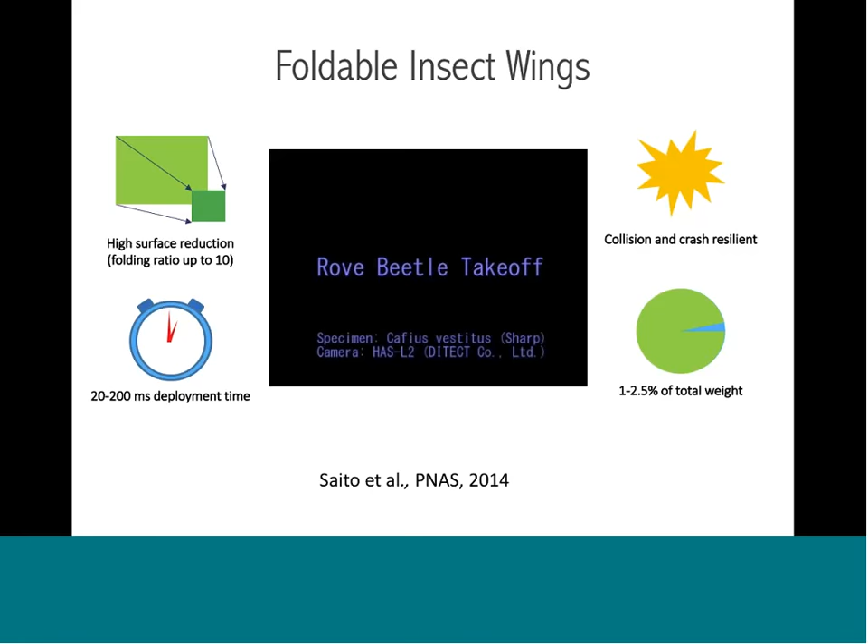We went back to nature, and we've seen that many insects do indeed have foldable wings. They keep them in the back, like this coleoptera, and they very rapidly deploy them to fly off. If there is a predator, or if they want to go out, they quickly deploy them. They are slower to fold them, but they deploy very quickly. The surface reduction is up to 10 times folding ratio, 20 to 200 milliseconds deployment time, collision and crash resilient for the reasons I mentioned before, and very small weight.

So we said, okay, let's start building drones that have these properties. Of course we didn't copy exactly the wings, but we developed foldable quadcopters where the arms are like origami structures. They can fold into a direction like this, and then they can fold on top like that. The folding in this direction along the red line is used for ensuring the rigidity of the arm during flight.

In order to fold them around the body, you have to first open up the top part, and then you can fold like this. And so the drone starts in that configuration. It's a very small package.

What we do in order to automatically open it is rotate all the propellers on the same side, which generates an opening. But like this, you cannot fly. In order to fly, you have to have the two propellers on the two sides rotating in a different direction. So as soon as the drone opens, the top part will fold on top of it, and then there is a magnet with a switch that detects that the arms are locked in place, and then automatically two of the propellers rotate back in the different direction.

And so you can see the system operation here. You can just launch it. It can fold and unfold. I just want to show you this in slow motion in a moment. It's very compact, you will see. Okay, so there we go.

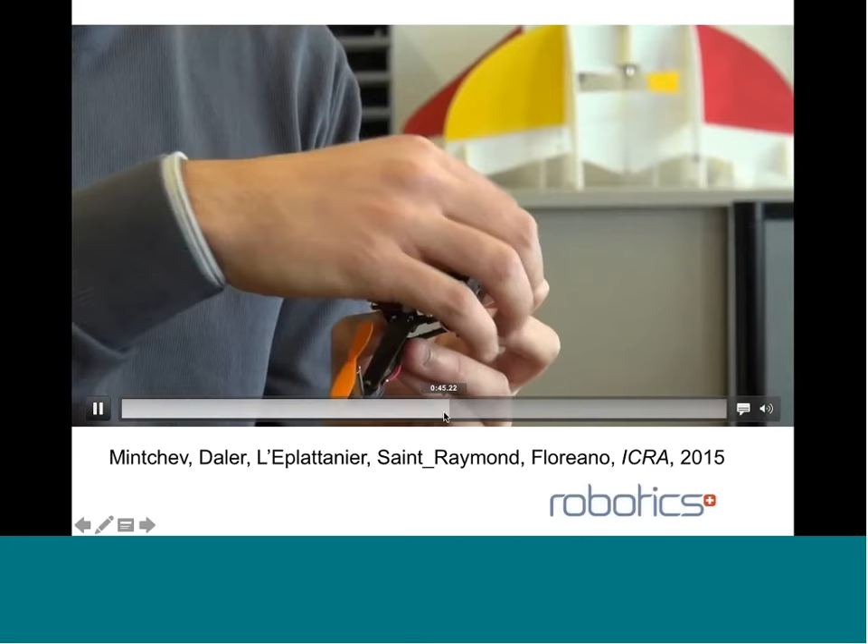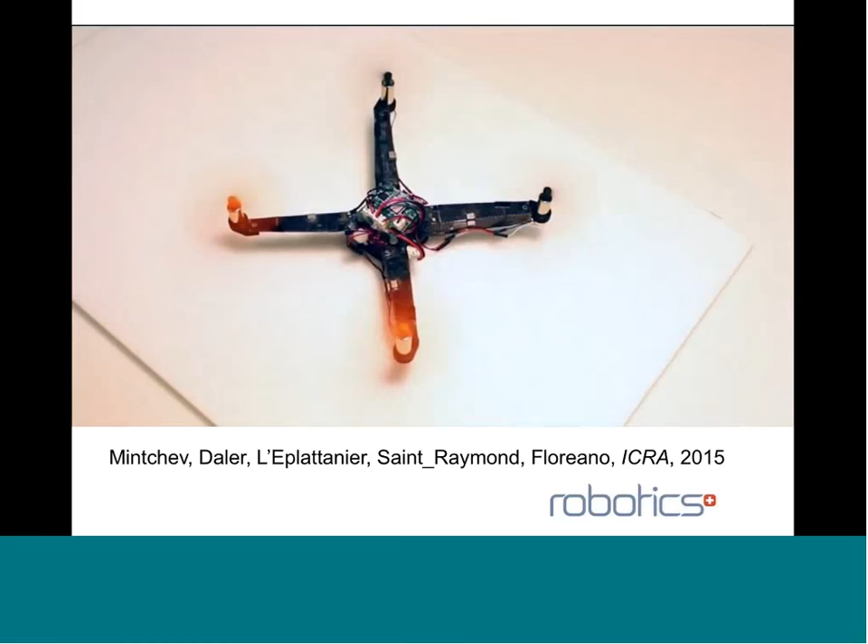So essentially, it's like I call it a pocket drone. You see the folding, then the top part goes in place, snaps in place, and the propellers switch the rotation. There you go. If you look in slow motion, it opens, the arms lock, and the drone flies off.

Then we made another version, which we tested in the field. It's a pocket drone, like some camera that you can keep in your pocket like this. It has visual and thermal spectrum, 5 minutes autonomy, 45 grams. This time the design is slightly different than the previous one, but essentially the idea is the same. So you have this drone that starts in a folded configuration, and then it rotates propellers in the same direction. It unfolds. As soon as we detect the maximum folding, two propellers rotate in different directions, and it flies off.

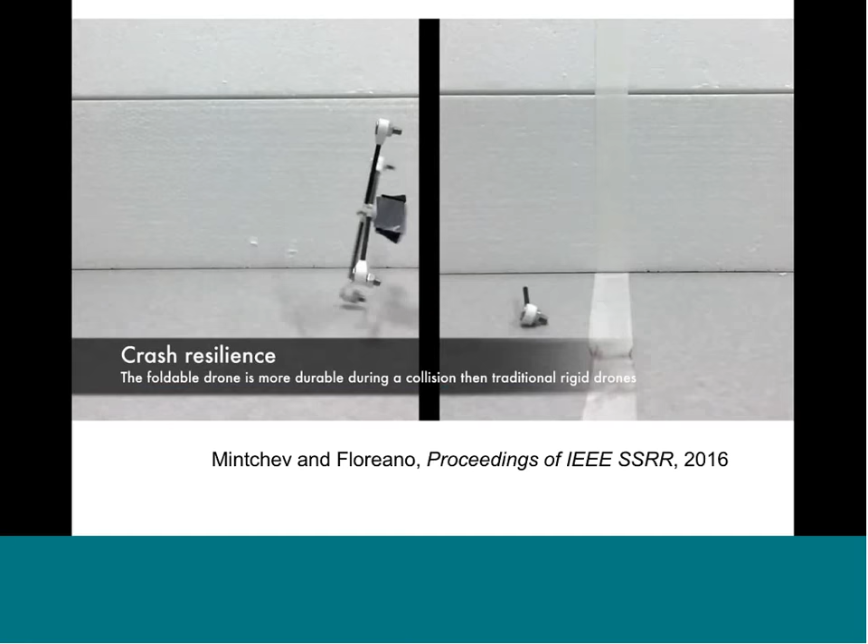It's also crash resilient because of this folding. You see, on the right you have a non-foldable version. On the left you have the foldable version. And because of this energy absorption, this drone can fall on the ground without breaking.

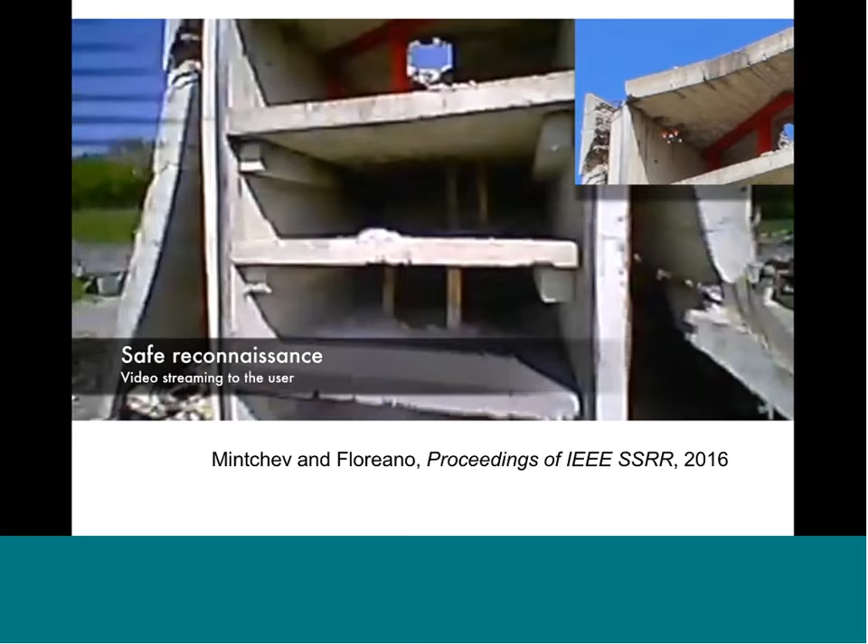We tested this with rescuers in a field we call a disaster village that we have near Geneva. You see a rescuer using this drone to monitor a building up in the air.

So now, can we generalize this folding structure to fixed-wing drones? Yes, we can. So we went back to Coleoptera. We looked at the crease patterns that they have, and essentially the way these Coleoptera unfold their wings is through two mechanisms. One is like a folding fan, for the part closer to the wing attachment. The other is a different type of crease pattern at the tips of the wings, used essentially for folding the wings upwards.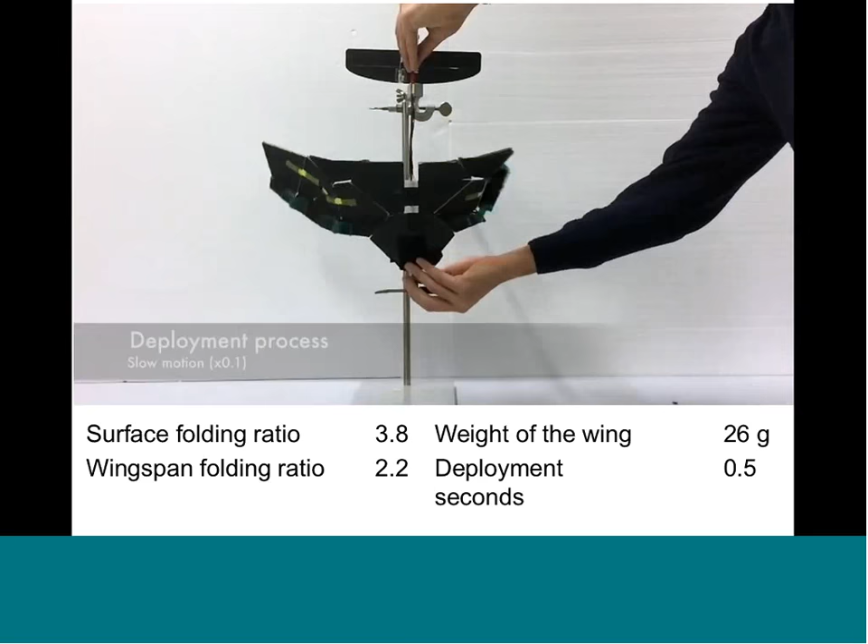You see that we are slowing down the deployment. It's one of the few videos where we slow it down because the opening is very fast. As soon as you open it, the wings pop up in place. See that? There they go. And once they're in place, they're very stable and rigid. You can simply launch it in the air and fly off.

Now I want to move on to another topic. Do I have to finish at sharp? Okay, so I lost a bit of time.

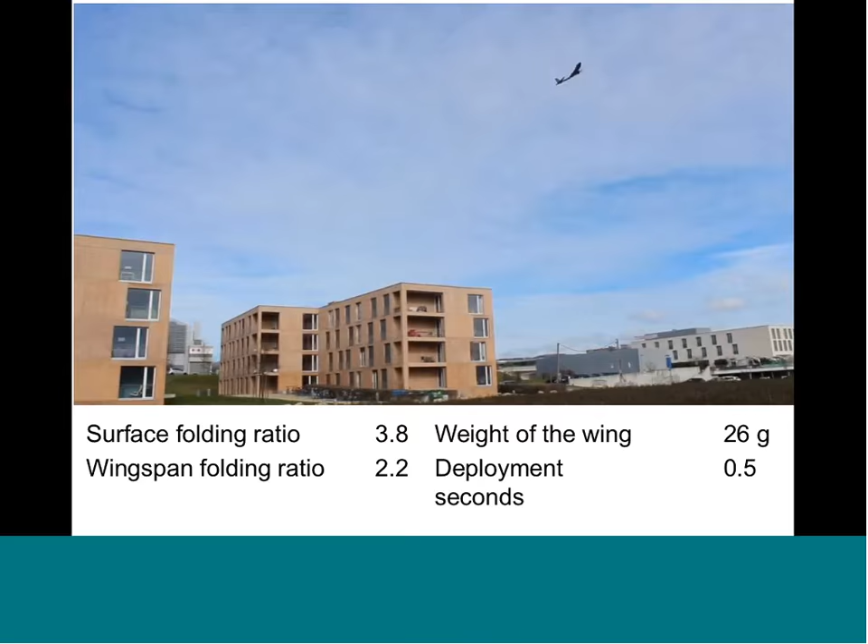So most of these companies are doing what we call business-to-business service. They are essentially using these drones to go from one logistic area to another logistic area where they land. They have very well-equipped infrastructure where they land, and only trained people can access and load and unload these drones. For those who think of sandwich or pizza delivery by drone, essentially the few operations they do involve dropping the packet or letting it unroll through a cable, for example—they don't let the drone go close to you. But if you're talking about delivery, you know, delivery is like the last centimeter. The post officer comes and gives a parcel to you. Could we have drones that go to your hand—what I call last centimeter delivery?

So there you have three problems to solve. One is the safety of the persons receiving these drones. The second problem is that there may be collisions along the way. The third problem is imagine you have a postal service with all these drones that are safe and collision resilient.

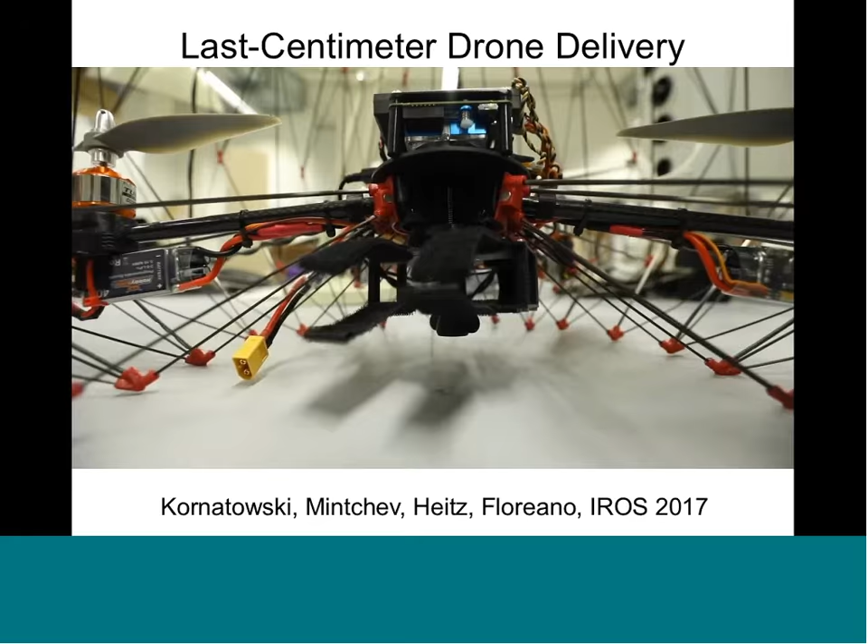Probably the next big use of drones is delivery. However, because of the laws of physics, the heavier the parcel is, the larger the drone must be. And this creates two problems. The first is that it's very hard to store these very large drones to transport them. The second is that because of the large propellers, they become very dangerous for people. So with this new drone, we have solved these two problems at the same time.

Here, this new concept, the drone becomes the package. When the package is folded, it's very small and you can transport it. When the package is unfolded around the parcel, it provides protection for people so they don't get cut, and it also provides protection for the parcel. The challenge to design this drone was to integrate everything together.

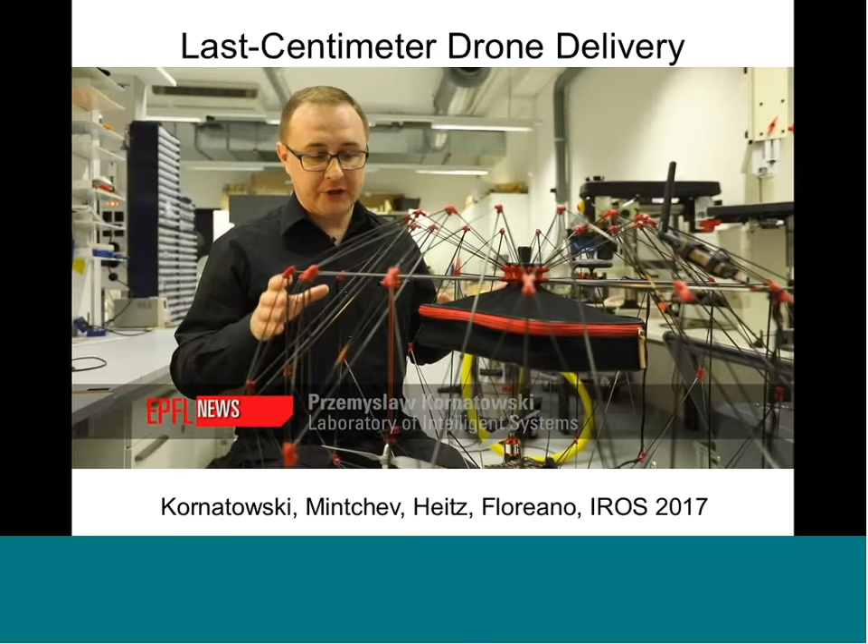So because of sake of time, I'll move on. So we have this drone. It's a safe drone. We also did a lot of work on the software, so we have an app which is like Uber, essentially.

You download this app. If you want to get delivery from people, you say, hey, I want to have this from you. It's more like the WhatsApp thing. You have a list of contacts with people who have different things, ideally drones at home. And you say, hey Jeff, can you send me the replacement plug for this? And the drone, you say okay, yes, here it is. Then you put it inside, close it, the drone flies off, gets to you, and you see the drone come. So we developed the app.

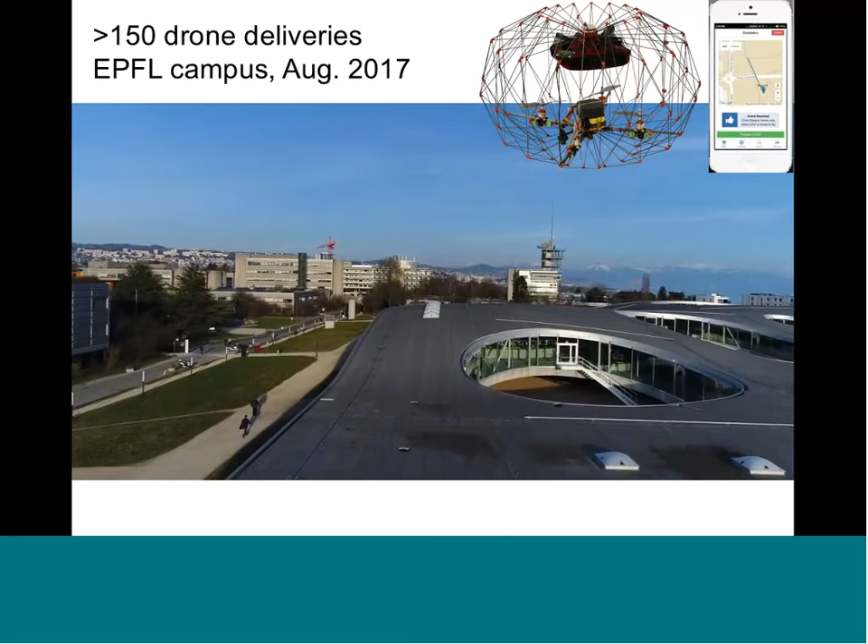We delivered 3D printed parts on the EPFL campus over the summer last year. We did 150 deliveries, and it was extremely successful. So now we are spinning off a new company for micro deliveries, last centimeter. We'll see how it goes, but it's going to be fun.

Okay, now a few more. The way in which these animals move and change their shape is through muscles in their bodies. Could we have drones that are very flexible, pushable, and still don't use servo motors, which are rigid, bulky parts? Could we have artificial muscles in there?

So with my colleague Herb Shea, we looked at dielectric elastomers, which essentially apply voltage onto parts, and then this contracts and expands. We looked at the way in which all animals have their muscles: they have a skeletal structure, and then agonistic and antagonistic muscles that pull and push this structure. So we created artificial muscles that, by applying voltage differentially on one side or the other of the structure, can bend in one direction or the other.

To start with, we didn't make a fully foldable wing, but we considered whether this technology could be used for controlling the ailerons. Instead of using servo motors for controlling the ailerons of these drones, we looked at whether we could use these artificial muscles. The beauty of these artificial muscles is that they are very flexible. You can fold them, you can hit them, and they will not break.

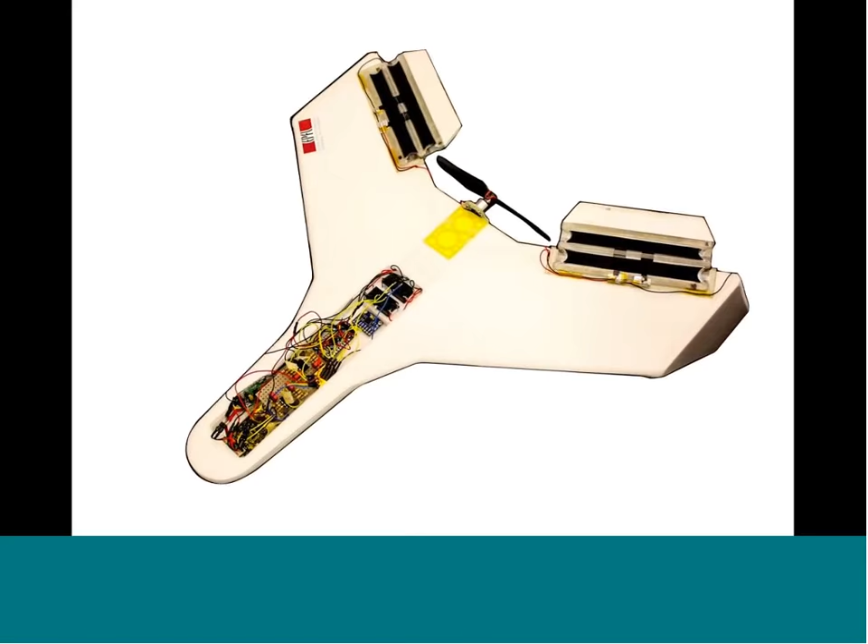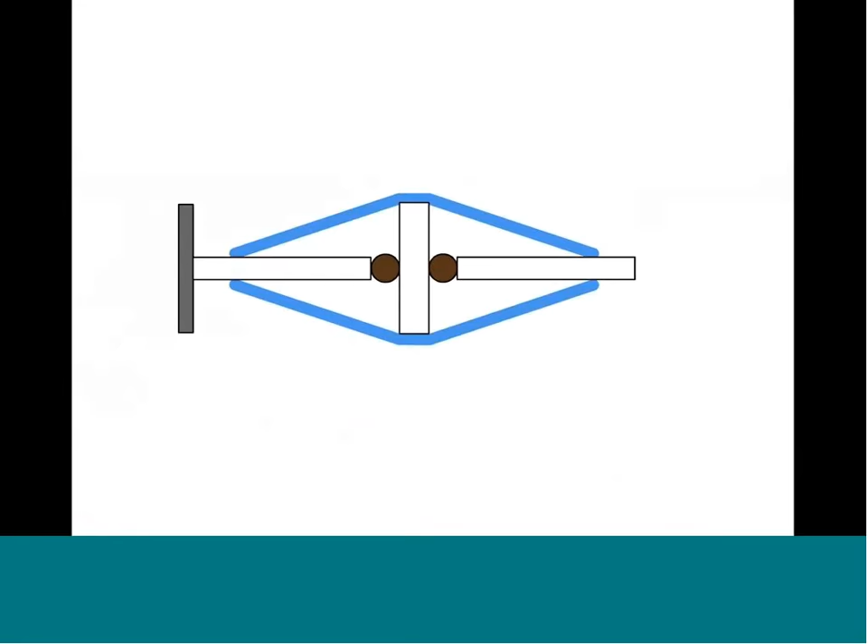So here is the drone on the back. Instead of conventional ailerons with servo motors, we have two sets of artificial muscles. As you can see, they are passively compliant. You see how they are built there. We apply voltage in one direction, they bend that way; voltage in the other direction, they bend the other way. You hit them, they absorb the collision. So they are completely foldable.

We're talking about 3,000 volts, but very small amperes, so the total current is very small. You just need appropriate converters, and over the past three to four years we now have very small converters. So it's quite great, very precise. That's a very interesting thing.

We are also developing grippers with electroadhesive properties out of this, which could be carried on drones. But if I have a few minutes, this is the movie—the Terminator dream.

So you have all these different types of particles and soft stuff that then becomes rigid, and when it's needed and where it's needed, you have a machine that can do stuff. Because soft robots are great, but sometimes in order to do work, for example move a screwdriver, grab stuff, sustain your own weight, you need to become rigid in some parts. And so we said, okay, could we have technology?

Variable stiffness, I think, is one of the main challenges of soft robotics, structures that can change stiffness. To make a long story short, we devised variable stiffness fibers. Let me show it to you in the video. This is a video that explains it. They can change their stiffness.

Normally it's rigid, but when you apply small voltage, it becomes something like spaghetti. On top of that, it's also very stretchable. It can stretch up to 4 times. And the transition between rigid and soft takes only 10 seconds.

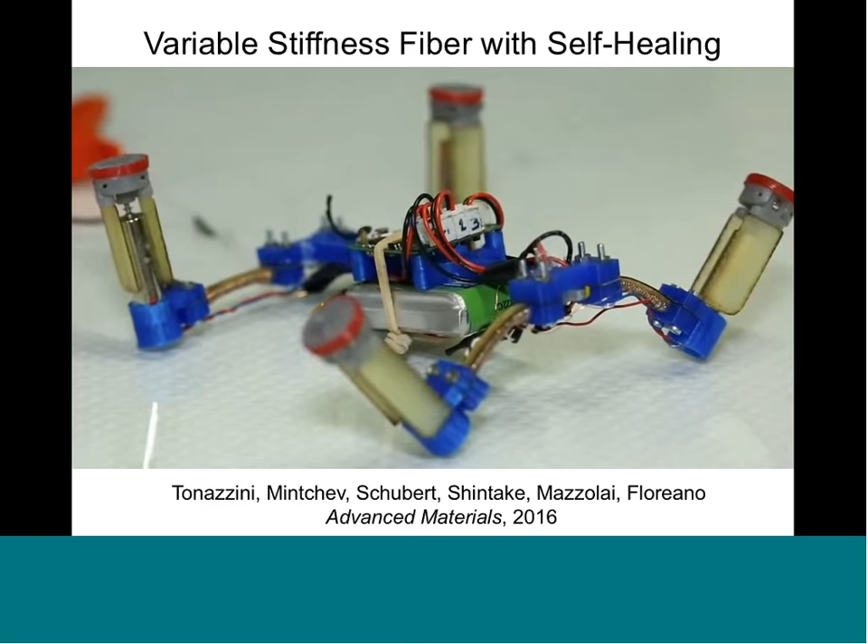Therefore it has a lot of different applications. For example, you can use it for robots that change their shape. You can use it for prosthetic devices, for furniture that can change their shape, or even in medical devices because it is very thin and you can couple it with different technologies in endoscopes, for example. It also shows remarkable self-healing capabilities.

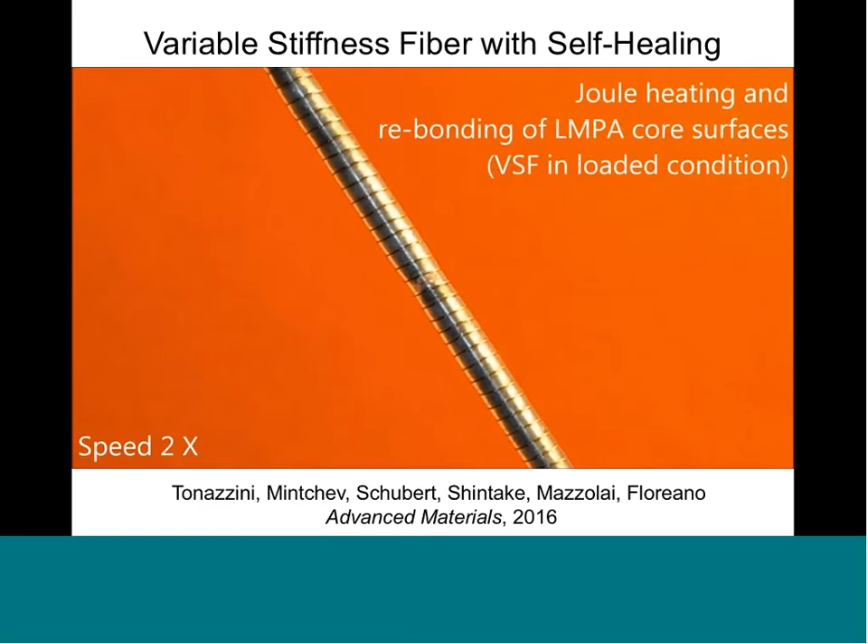We would like to transform our thread into a robotic material that is able to mimic the complex functionalities of biologic tissues. So what you see here now for drones is that we can change the morphology of the drone as soon as we heat a little bit of material, which essentially forms the arms of this drone. We can translate from a drone shape to a car shape.

I want to show this to you. So here it flies. Here it's in flight mode, very stable. And then as soon as you go to the ground, you can shape it now manually into a different shape, and then you can have something like a car.

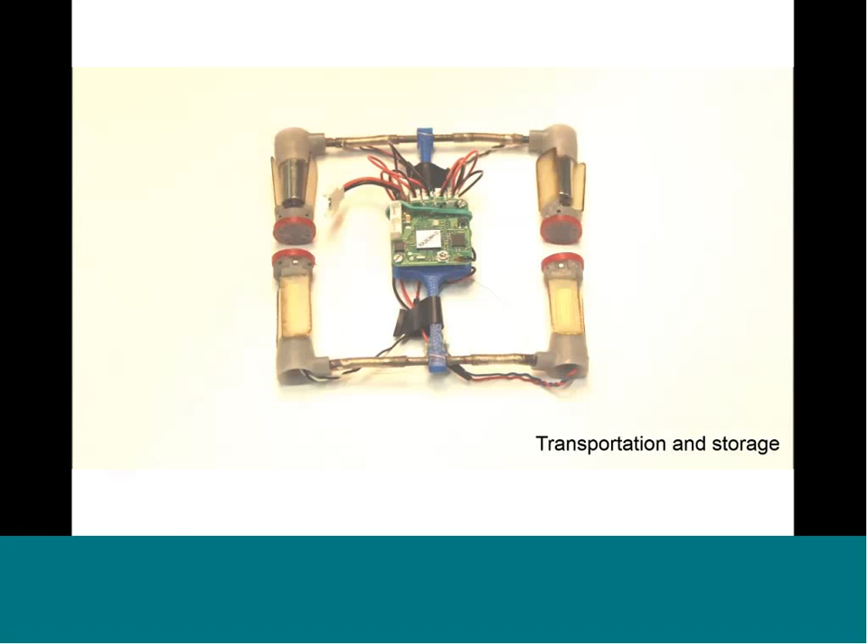So the propellers can fold, and once they're folded, you can simply drive around. It's completely collapsible, so you can put it in a pocket. This is work in progress.

The title of my talk should have really been biologically inspired soft drones, because that's a type of solution or strategy that is widely used in nature.

You can use these soft robotics technologies for novel types of adaptive sensors that can bend. You can have mechanical resilience to collisions and safety for humans. You can have adaptive morphologies for optimal multimodal locomotion in different situations. You can have foldability for transportation or rapid deployment, robust and foldable artificial muscles, and even variable stiffness bodies.

So it's a great area of research, and thank you very much for your attention.

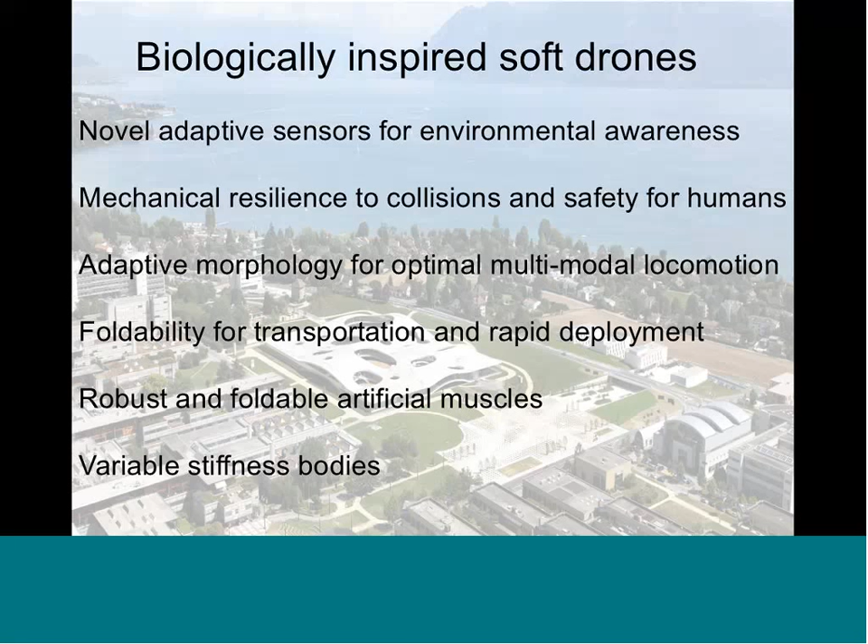There was one more question. You mentioned your foldable wings where you can fold one side versus the other, segmenting part of the wing. You said that with more control or sensing on the actual feathers of the wings, you'd be able to control the robot more efficiently or do more complicated maneuvers. So are you physically segmenting each part of the wing, or were you just holding and collapsing the wing?

At the moment we are simply collapsing the entire wing. We have very simple servo motors that tell how much the wing folds in place - that's essentially what we're doing, just folding in place. Now imagine we're making this feather structure much more extensive than it is here, also on the tail. If you could sense local stalling positions, you could drive the system into conditions that normally wouldn't be attempted, because it's very difficult to recover before it falls. So ideally, I would like to have the control fully on board, decentralized, with local sensing of flexions. We know birds have mechanosensors at the attachment points of some feathers - many feathers are just here on the tip, and they're simply used to detect when the flow detaches from the wing, which signals a stalling situation.